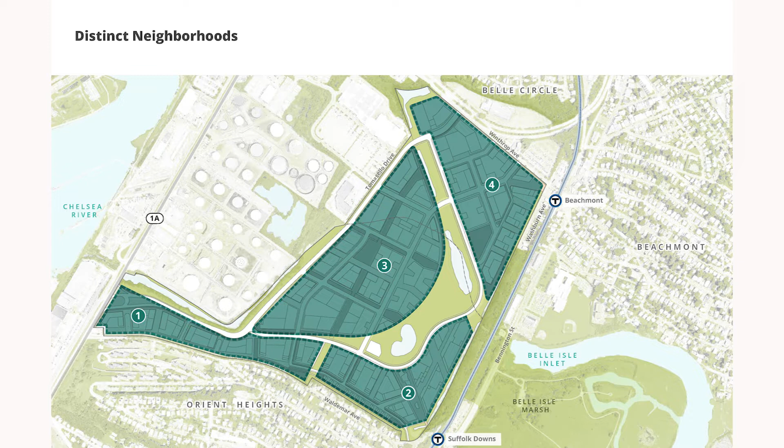So again, coming back to that central common. So here's the central common. This is 15 acres. And after we're done, it still will be light out, presumably, and you can go out and look from the windows here to get a sense of the size of this. But it runs basically from a cluster of trees to the right of the pond that's out there, all the way down past to Sales Creek. So it's a big chunk of open space, 15 acres in total. Again, public, we want this to be very activated by the public.

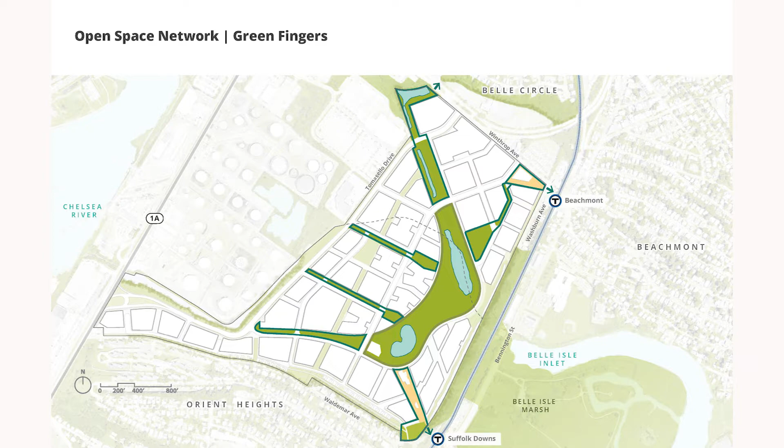And then we want to add what we call green fingers. So these are these pieces that come down right through here, in a north-south axis toward that main park. And the green fingers are part of a water management system. So Doug's going to talk a little bit more about this as well.

But when we think about this from a resiliency perspective, we know that the site over time will be subject to some flooding. And so over a 100-year period of time, this site is measured in terms of the possibility of flooding on 100-year increments. And we know that there will be some flooding, just given the sense of what's happening in the world and all the things that are coming our way.

These are green fingers that will be green during 99.9% of the time. But when there is water that will come in, the green fingers will conduct the water back to the central open space, and we will create a stormwater management system. There's no stormwater management system that exists on the site today, so we're going to have to build that as well. And that stormwater management system will appropriately manage the water and run it off-site as the storm subsides. So those are the green fingers that run through, again, this north-south axis here.

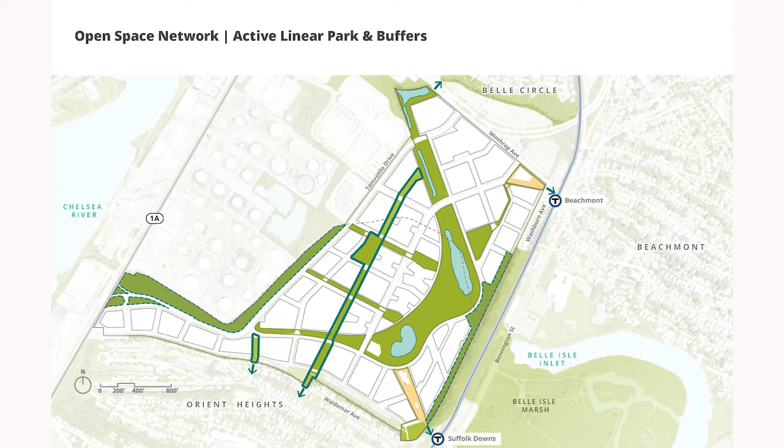And then we think of an active and linear park. So if I come back to this piece right here, this spot right here is what we call an active linear park. So this is a park that we want to have be very active for exercise purposes, for the public, for walking, for whatever. And these are, again, precedent images that give you a sense of the kinds of things that we can bring to that space, different ideas. And these, by the way, are great opportunities for us in working with the public, for you to give us your ideas, your feedback, and your thoughts on what this open space can look like. But that gives you a sense of how that lays out.

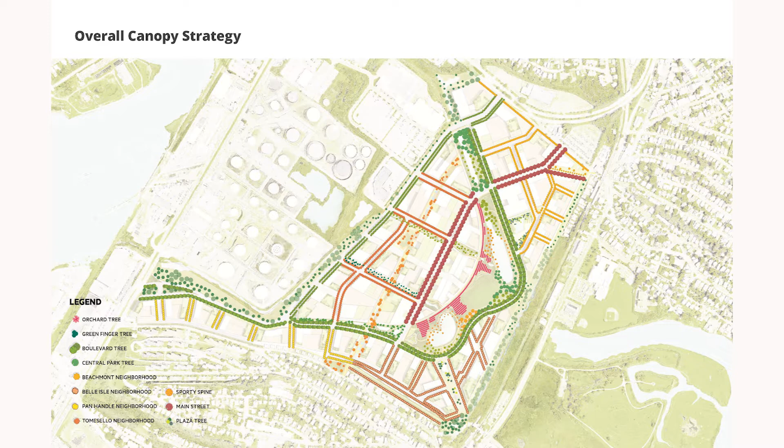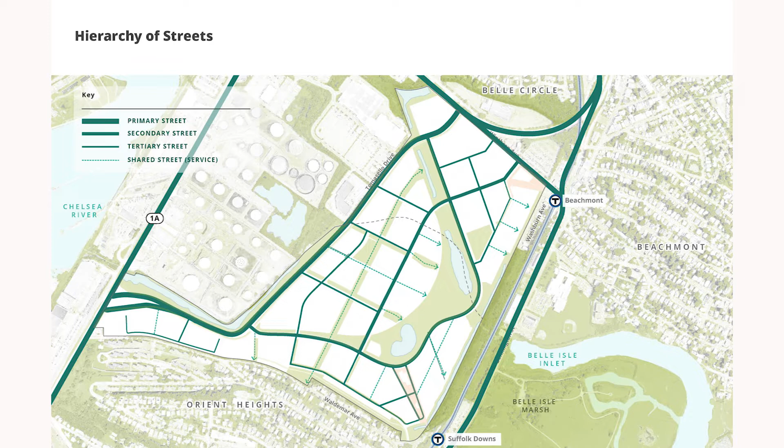I'm going to just run through a little bit more and then hand this over to Doug in a minute. This is a slide in which we talk about the hierarchy of streets. Essentially what this means is there are a variety of different types of streets on the site. As you would imagine, these are smaller blocks within the Revere portion of the site, and these are therefore smaller, more neighborhood-oriented streets. 2 lanes, just 1 lane in each direction. Some of these streets, like Tomasello Drive, are meant to manage more traffic through the site, so Tomasello Drive will have more lanes, and therefore it will be a wider street. So this slide is meant to illustrate that as you go through.

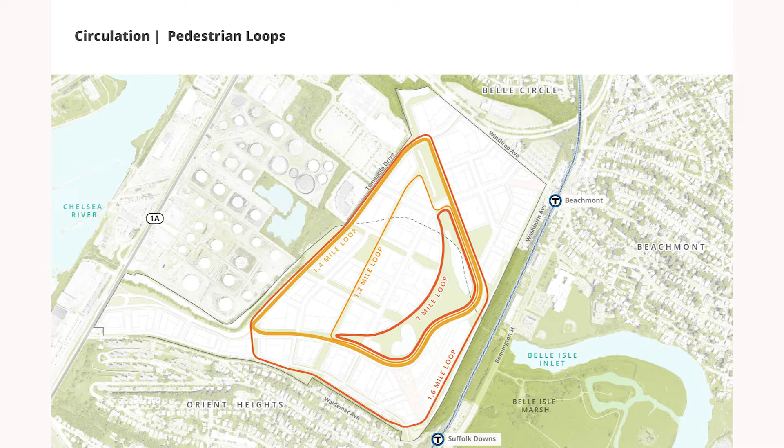These are pedestrian loops. So I identified that one spine that kind of runs through the middle of the site, and these are full loops that allow you to walk or run 1.6 miles or 1 mile, your choice, basically, of different loops throughout the site. It's a big site. Just the distance between Beachmont Station and Suffolk Downs Station here inside the site is a full mile, by the way. So it's absolutely possible for us to create an open space system that creates loops that are really useful and good for people to be able to exercise or walk and really make use of, especially a nice evening like this.

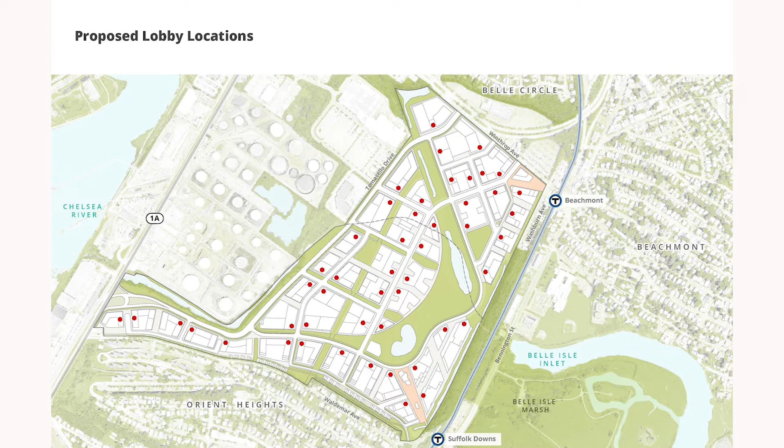There will certainly need to be bus loops on the site. It's such a big site that to get people from place to place, certainly to the T stations as an example, we'll need to think about various bus loops that will connect people to different parts of the site, that will allow people to connect to their office or to their home or to a piece of retail that becomes kind of their favorite retail. So we're thinking about internal bus loops as well.

This is our retail strategy. Again, you've seen this slide, I think, before, but essentially we want retail to stretch and be very active from Beachmont all the way over to the Belle Isle Square section to the Suffolk Downs T-stop. And this is a loop that, again, will be about a mile at least with retail on both sides, making this a very active walk as we go through.

And this kind of gives you a rendering of that retail piece in the midway point. This is approximately in this area here. This is in the midway point with great restaurants, outdoor seating, walkable streets, all those sorts of things. And again, I think we did this civic node previously. So with that, I'm going to give some of the details on streetscape back over to Doug.

Great. I'm still here, able to answer questions as well. Thanks, Tom. Any questions at this stage in the process, folks?

Joanne? Tom, I got a couple of questions. Oh, thanks. So as the president of the Friends of Belle Isle, I know you have a lot of wildlife in this area, and I think when you start building and you're bringing in people to use the open space, you're going to cause these coyotes and whatever we have out there, the bunnies, to move in another direction. We feel that they're going to move across the street to Belle Isle. So what we want to do is push to not have dogs there, so we can keep that sanctuary just wildlife, because the dogs intimidate the wildlife. So I hope you could work with us on that.

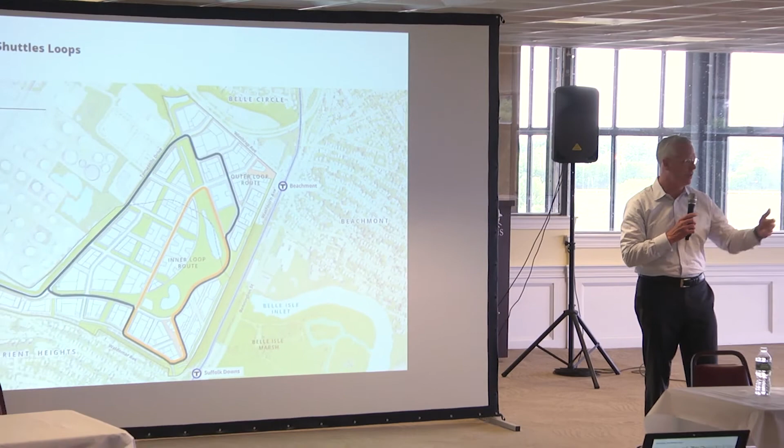And the second one, unrelated to that, but when you were talking about the green space and the pond, any way we can make that like an ice skating rink in the wintertime? Absolutely, that's an easy one. One of the things on the slide was a skating rink, so we absolutely think about that, like Frog Pond on the Common where you can rent skates and all that sort of stuff. That would be great. We're all subject to how many freezing days we get in the future, but hopefully it freezes.

I would just add one quick thing on the walkover. We'd love to do that, okay? But as we get off our site, we're less in control, so we need help from other parties. There's an MBTA parking lot there that might be part of that solution. The DCR runs that road; they could be part of the solution, or maybe not. There are professionals there that are nervous about the slope of that road and the traffic, but we're deep into that right now, trying to help figure that out if we can.

Yeah, just to follow up to that point, you're working with the city to make this fit within the neighborhood. I'm looking for state delegations, city leaders, and so forth to work with these guys to push the DCR or whoever else needs to be pushed to make that happen, because for this to be really successful, that needs to be a major piece of it.

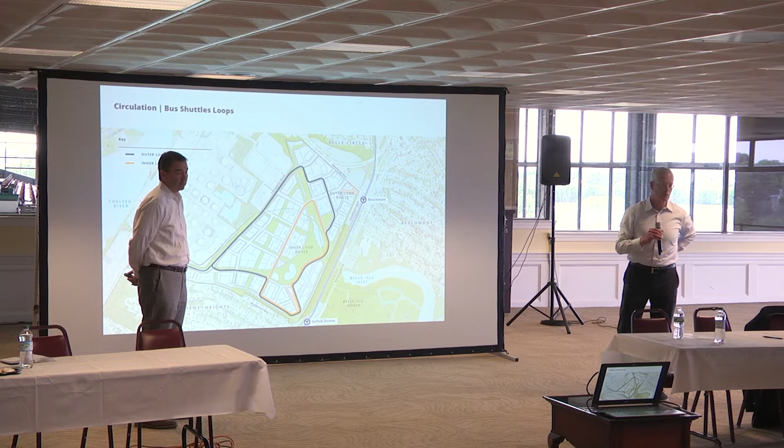We will continue to work with the state. The state delegation has been awesome with us, from the senator to the representatives; everybody's been terrific all the way through. We will use every lever we can to make all those pieces work, and it's certainly a priority of the city. I have a feeling some of these questions, particularly traffic, which we'll have a whole meeting devoted to, might be addressed when Doug gets into his presentation. Why don't we move into that?

Just want to follow up on a couple things too, going back to the Councilor's question. Every building will have a construction management plan with a detailed rodent control section, and we do start in advance. Because we already own this site, we may be able to do some things well in advance. Demolition will probably happen first, particularly of the horse barns, which is actually a good thing, since there's probably a few critters in there today. So we're going to be focused on that.

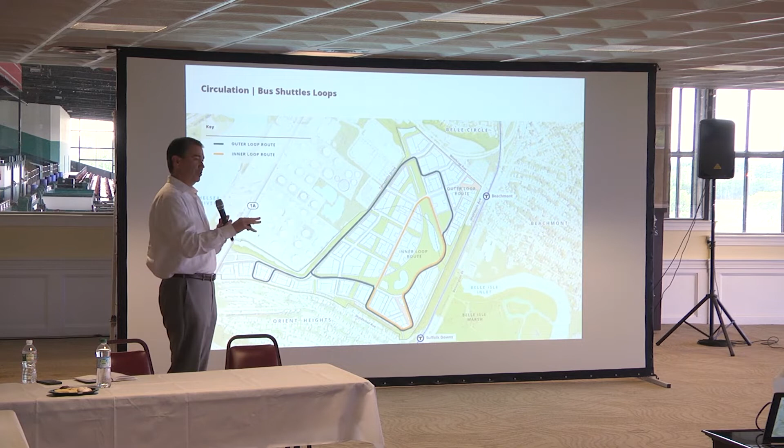I think it's really important to go through that. I had a series of other thoughts, but we'll keep going. Actually, this was the other one too: the reason we're showing you where service and loading was on this map was purposeful, because none of the service or loading is facing outward to any of the neighborhoods around us.

And that's both on the Orient Heights side as well as on the Revere neighborhoods too. The loading is really on interior streets, basically, so that we don't have any loading or service that's on Winthrop Avenue or on Washburn Avenue. And that's pretty purposeful from our perspective. So we do look at it very closely.

As Tom said, as we come back with more detailed design, the site plan review, we'll actually be able to show you exactly where the loading docks are. They'll likely be where those locations are shown, but then we'll be able to talk about the scale of those loading docks. Also, again, these are professional buildings. These are all regular streets too.

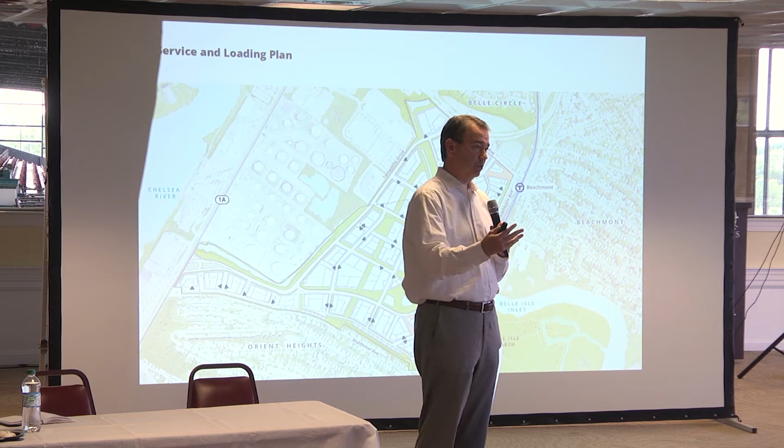So our perspective is this is not some wide open loading dock like you'd see at a grocery store or something. These are really roll down doors, very confined, and the trash and everything is kept inside. So when the trash gets picked up, it's the day of the pickup. They might wheel them out, or even the trash truck goes in sometimes to get it as well. But it's not outdoor type trash, it's always internal to the building. So just want to throw that out there.

And the reason why that's important is because, again, we're lucky, we're not like the Seaport. We can do this right from the beginning. So the cycle track network actually extends all the way through the site, and we're also putting a new one on Winthrop Avenue too. And I'll show you this cross-section a little later, but today, as you know, there's a lane, there's a curb, there might be a 5-foot sidewalk, I'm not really sure, it's kind of tight, and there's immediately a chain link fence.

We're actually going to be giving at least 20 feet of our site to really expand that so that we will have a tree strip, a cycle track, another landscape strip, and then a sidewalk to really make it very beautiful on the Winthrop Avenue side. So we're giving quite a bit of land here to really improve or expand what's happening on Winthrop Avenue.

And then when we get into the interior of the site, we do go back to typical bicycle lanes that are on the street, but part of that is because we're in the retail section now. So we want the bikes off the sidewalk level, back onto the street because it's more of a pedestrian experience. And we'll go through each of these. But the important point was that we're basically trying to interconnect our site, re-stitch Revere back to East Boston and provide a lot of alternative modes of getting around through the site.

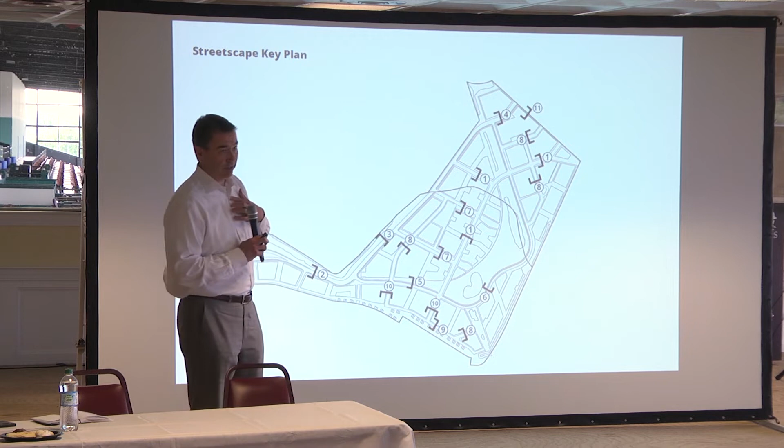But the streets themselves are going to be maintained by us, which I think is a very important point too. So I'm just going to go through the sections of each of these. What this is showing, if you look over here, is a diagram. So this is our Main Street district, and then this is a cross street that goes to the current shopping plaza. What this is showing is a cross section, so this is just showing you how this sets up.

So if you were to walk down the street, it basically shows we have one lane in each direction. We have on-street parking. Again, parking for us is really important from a retail strategy. We want on-street parking on the site. And again, it's on-street parking for people to be able to come here to the retail, or visit the parks. It's not meant to be for our residents, like free parking on site. They should be parking in our garages. It's more for people trying to come visit the site.

And then we have the bicycle lanes. And then we have very wide sidewalks, almost 20 feet wide in the Main Street district, because again, this is the main boulevard. This is the real shopping experience. And you saw the rendering earlier where we showed the restaurants spilling out onto the street. So again, it just gives you a sense of that. And obviously we have street trees as we go through it. So this just shows you a typical section of what that looks like.

Doug, can I just ask a quick question? Two questions actually. In terms of management of the on-street parking, are you planning to have meters? What kind of durations do you expect, et cetera? And a more general question, Boston is much more advanced than we are in terms of the specifics of a lot of design criteria, complete streets, et cetera. Is it fair to assume that all of the streets, whether in Boston or Revere, will be built and maintained to the highest standards required by either or both communities?

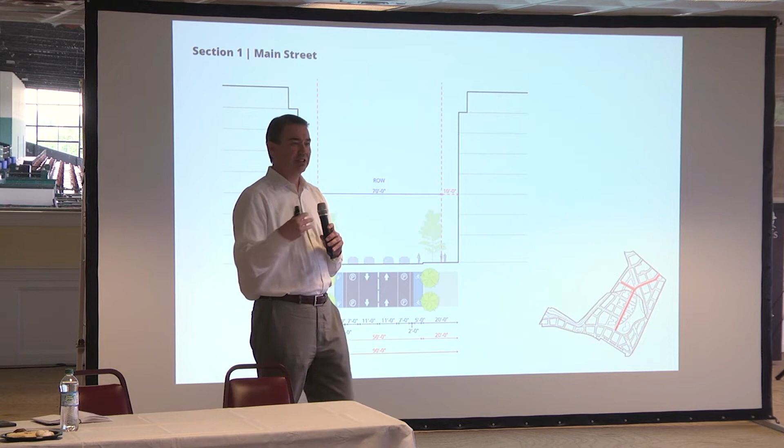We'll definitely probably put a line when you cross over the border, that could be cool, but the idea is not to make it feel like there's a different scale or quality of it. Now, in the neighborhoods that Tom showed, there might be more distinct elements within neighborhoods, but the idea is that the street guidelines will be very consistent throughout the site, and that's very important. So again, this is going to be a very Class A type community from our perspective, so we want to make sure it's upscale.

So curb management, thank you, because a lot of questions Bob always has. So a couple of things. We definitely want it to be regulated parking from our perspective. We see that as two-hour parking, maybe three-hour parking. We also want it to be all the way into the evening. So we don't want to be Back Bay where after 6 p.m. there's no regulation, so then no one can use it from a retail perspective. We want it to be very active.

Also, if I go back to this plan, we actually have on-street parking all the way along this park because we were the developers of North Point, and we had a five-acre park at North Point. One of the biggest complaints from the neighborhood was there was no parking, so they couldn't get to the park to use it. And not everyone's within walking distance of that park. If you're a mile away, that's a long walk just to get to the park.

So again, from our perspective, we want it to be regulated. We haven't really thought about whether it's charged, but it has to be monitored from our perspective. And we have to also work with both cities to figure out if it gets to the point where it gets so busy, because again, the other thing too, we're not only building the open space, we're going to maintain the open space.

That's a huge annual cost. I mean, the prospect of us being able to do some metered parking in the future when there's enough demand, so we can help support it, may be great, but it's not our goal. Our main goal is to make sure that we want to get people to the site, which is more important. But it does have to be regulated because we don't want it to be filled with people going, I'm going to go park at Suffolk Downs to go take the Blue Line to work. That's not what we're looking for. This is meant to create an active site so people can actually come and use it.

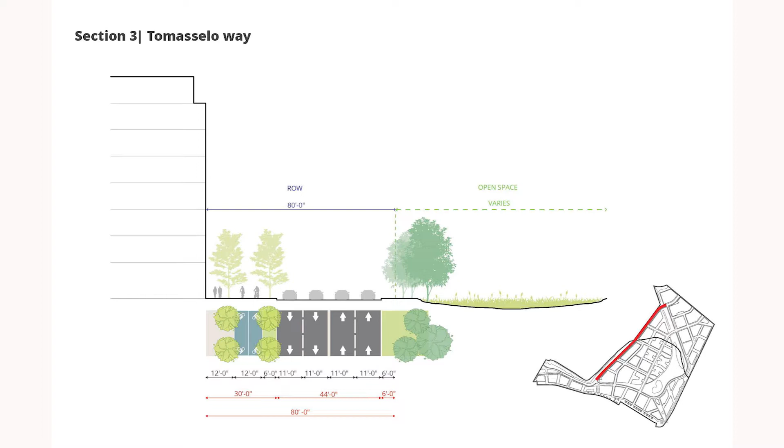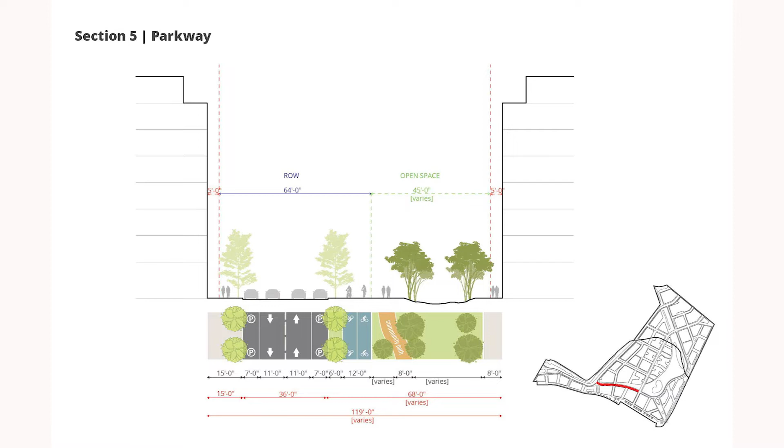Now these are the linear parks. This is where it gets really kind of cool. So, as Tom talked about, we have these really cool linear parks. Here we call this the Parkway. You get a very similar circumstance where you have 1 lane in each direction, parking. Now there's no parking on Tomasselo, which is purposeful because Tomasselo really is a major thoroughfare. But as you get into the Parkway, you are getting parking on both sides. You get the cycle track, which is actually in the park. But separate of the cycle track, you also have a community path, because this truly is a cycle track. So you have a very wide community path for people who want to walk, or when the toddlers are on their low bikes. And then there's the passing through on the cycle track there.

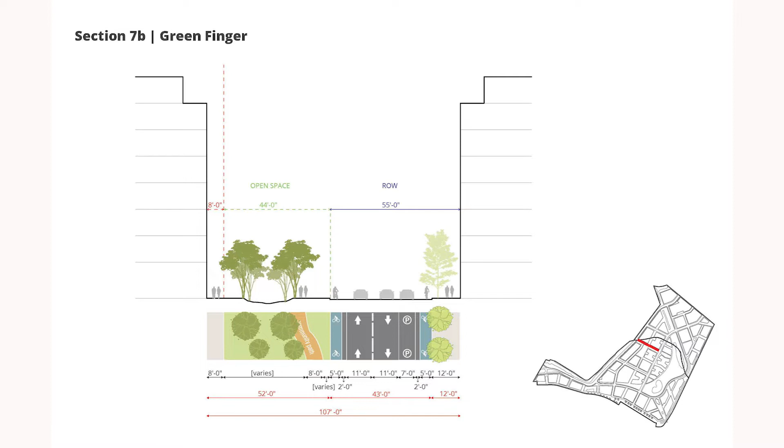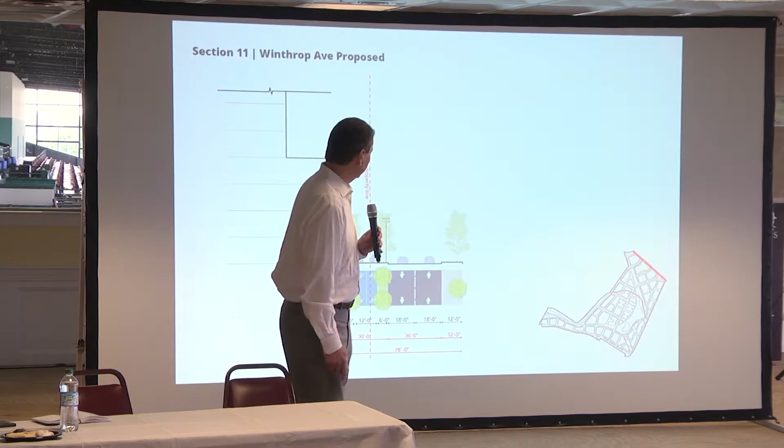Okay. I know those are riveting, but just one quick question. Some of the cross-sections, especially on Thomasella Road, are fairly broad when you add in the roadway, the sidewalk, the bicycle tracks and so forth. And on the other side of that is Stop and Shop, et cetera. Have you begun to look at the pedestrian crossing issues for those major thoroughfares?

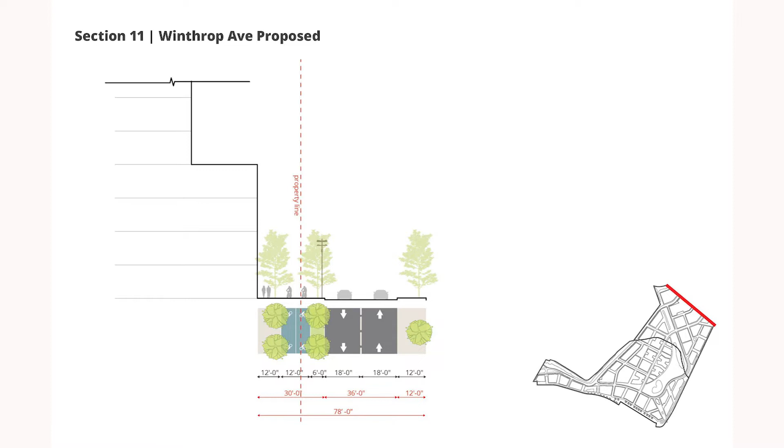Yeah, I think that's something we're going to get into more in detailed design, but I will say this. So if I go back to the site plan, I'm going to jump around, because I think the retail plan is important to show this. So as you know, our retail strategy is around 2 new retail squares or plazas that connect the Main Street district, but we purposely have that Main Street retail district going up this way.

And part of the reason is that some point in the future, these will not be oil tanks or a suburban shopping plaza. And so the idea is that we are creating, which is purposeful right at the intersection, this might even be a stoplight in the future, an intersection here that will really allow pedestrian-friendly crossing across it.

And the other thing too is that the cycle track that goes through will respect it, so pedestrians will be able to get to the edge and the cycle track may actually veer in, so that pedestrians will only be really crossing at one time the 4 lanes across the street. So we don't have more detailed design, but this is a really important connection point that we'll be working on as we go forward.

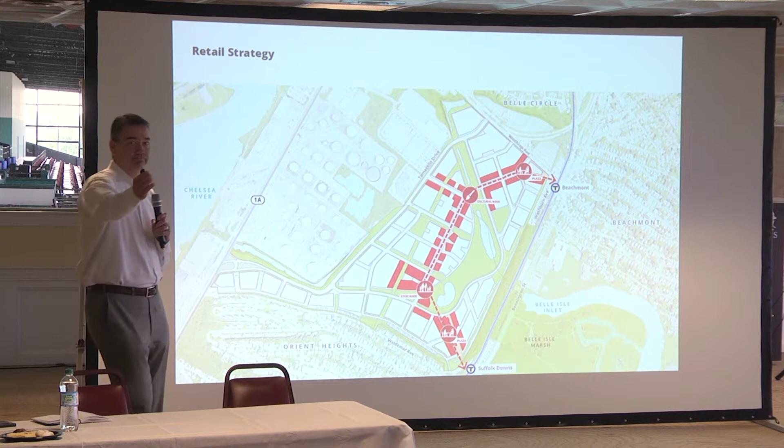Can you give us a little bit more detail about the bus shuttle you were talking about? Can you go back to the slide of how it connects to what you were talking about, and also is it free and open to the public, and how frequently does it run? Yeah, so I think he's asking for more detail about the bus shuttles, where they are, how frequently do they run, is it open to the public? I think those were, is it free? I'm not sure about the free part yet.

So a couple things I would say. In the earlier phases, when we start and we're just building phase 1, we may not have shuttles because we're within a quarter mile of walking distance of the actual T stations. But at full build out, there will be an inner loop and an outer loop shuttle system. And the idea is to connect both T stations throughout the entire part of the site.

This is actually a slightly outdated plan. We've actually updated it. These shuttles actually both go here and then come back. So there's a one-way road now in here. So we got to update this plan, but the idea is that we want to be next to both plazas basically and to connect them through. Frequency at full build out could be running every 4 or 5 minutes basically on this.

We do want this to be open to the public. And again, in the earlier phases, they definitely would be low cost or close to free, but we haven't had that discussion internally yet at this point. But again, it gets robust as we build out the site. What's the reasoning for potentially charging for that and having the parking be free?

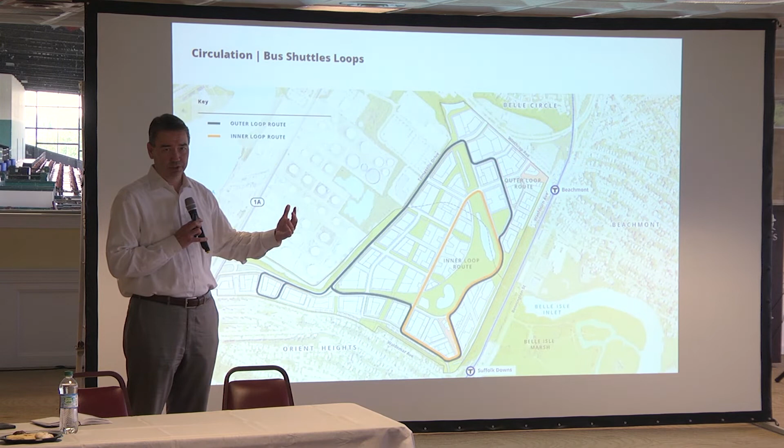So I think the first thing to take from this is that we are committing to do a dual shuttle system, right? Which I think is a very important point, because there are some developers that would not do that. We're also trying to get away from companies doing a whole series of their own private shuttles on the site, and really it's also almost offered as an amenity too, which I think is important. The second thing is our retailers are going to want it to be free, right? Because they're going to get people coming to the T stations that want to go through the site as well. So I do think this is the beginning of the conversation. But I appreciate those comments.

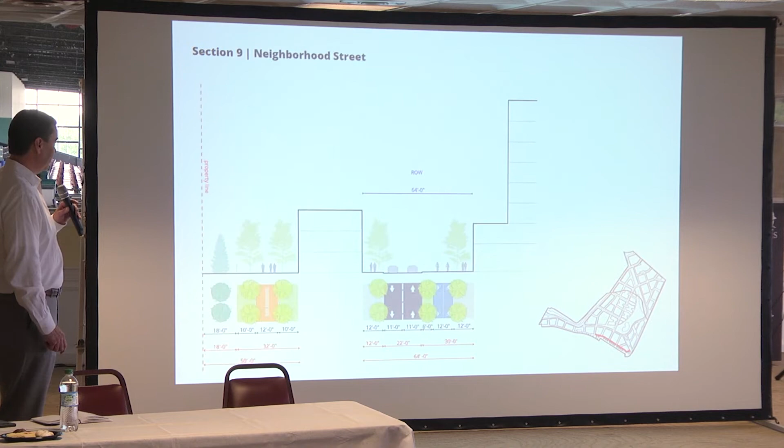Okay. Tom gives me all the exciting topics. I'm going to go to infrastructure next. Yeah.

So this may be hard to read. This is about water and sewer. What you're seeing here is, again, if you recall, when we originally submitted for the first MEPA filing, we had two programs. We had a Program A, which was kind of a pro-Amazon program, a little more office space. And then we had a Program B, which had a little bit more residential space. That really is indifferent to the city of Revere, to be honest. Revere is at least 50% commercial, and we will never do more than 50% residential by zoning, right?

But the reason why we show both of these is that there are differences in wastewater generation and water usage based upon the two programs, because if it's more residential, there's more wastewater and more water use. This simply shows you, in Program A, the amount of gallons per day of sanitary sewage, and then gallons per day of water usage. This is the Boston numbers, and this is the total numbers.

And then again, they do go up in Program B, where there's slightly more water and slightly more sanitary. But just to get through it, Revere is almost 700,000 gallons per day. So this is a big site. So just to give you a sense. Again, this is over 20 years. But we wanted to at least show you those. And this obviously will be in the filings that we do.

So now we're going to get into the weeds. So here is the site, as we know, outlined in blue. And what I'm showing you is the existing sewer system in the area. So in Revere, we have an 8-inch gravity sewer that goes this way, cuts up this way, then comes back to the site, and then it gets to a 36-inch wastewater interceptor, and then eventually gets into the MWRA system. And then it basically goes through Chelsea Headworks to the Caruso pump station, and from there, it's pumped over to Deer Island.

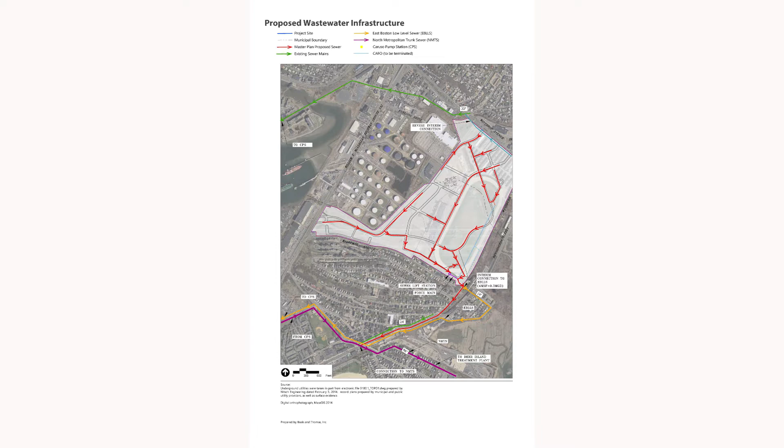So we're actually downstream of the Caruso pump station. Right now, everything in Revere and almost everything in Boston goes to the Caruso pump station. So the fact that we're downstream of it keeps capacity for MWRA as well. So they're very interested in that too. And again, it's kind of a phased approach.

Now, the one thing we're going to be working on with Frank Stringy and the Revere DPW: if we start here at Beachmont, it would be very expensive for us to pull all of this sewer line today to make that happen. So we may be looking for an interim connection through the Revere system for one of the earlier phases. It would only be an interim connection because the idea is that we would eventually switch all of the development over to this Boston connection.

And again, we're doing something similar with Boston. At first, we want to connect to their existing system, so we have the time to build and construct the new bypass line. We actually did this at North Point as well. We built a 4,000 linear foot line. Mike Borowski, by the way, worked a lot on that. And they were thrilled because we didn't have to go through Kendall Square. And so again, they kept capacity.

So I think fundamentally this is a very strong plan. It's just that we're going to need to work with the City of Revere and City of Boston on some interim connections just to get us moving for the earlier phases.

Doug, as you go through that in these interim phases, are there any points where you see any capacity challenges, either in terms of water supply or disposal capacity? Yeah, correct. If we go back, we would not take the 8-inch gravity sewer because that's very constrained. We would probably do an interim connection down Revere Beach Boulevard to get to the 20-inch line that's there.

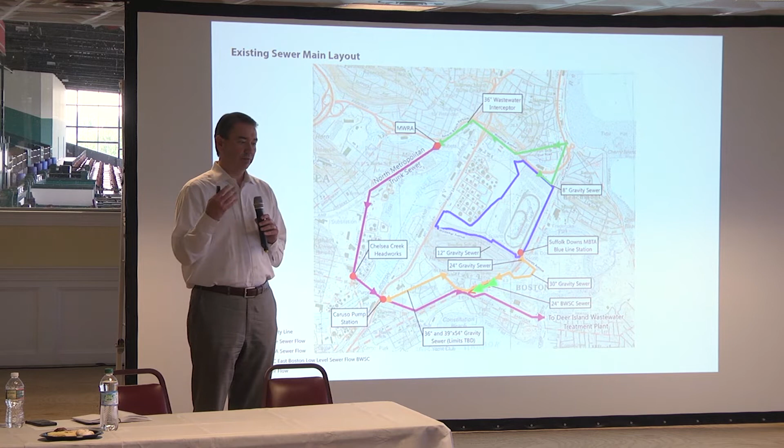Now, the other thing to talk about, and some of you may be familiar with this, MWRA and DEP have a program where a developer, or even a city, can't put another gallon of sewer into their system without taking out infiltration. They call it I&I. What that means is that we're an older region, which means that there's a lot of combined sewer and drainage flows, which means we're pouring stormwater into sewer systems, which means Deer Island is treating rainwater. We also have a lot of leaky pipes.

And so if we were to build a project with 100,000 gallons of sewer going into it, we actually, through the city, have to take out 400,000 gallons at least of I&I, or in the case of Revere, almost 1 million gallons of I&I. So it means that the system always has capacity, because if you're putting a gallon in, you've taken 4 gallons out. So we actually pay fees. We'll be paying fees both to the City of Revere and the City of Boston for these I&I projects. And they're not insignificant. They are on a building-by-building basis.

So the first thing is, because of those, we'll be able to create capacity through the City of Revere. And again, it would be our cost to do a temporary connection. Now, we don't like temporary interim connections because they cost money and we're basically abandoning them. But again, the prospect of trying to figure out how to get that sewer line all the way across the site, because the site's almost a mile across, is we'll go through that.

So I'm going to switch to water. Again, very similar. So this is the existing water. So today we actually get our water from the City of Boston for the clubhouse, I think, and we also do get water from the City of Revere, I think, for the horse barns. There's nothing really out on Route 1A. There's a high-pressure system on the Orient Heights. And then obviously we actually have a City of Revere line, which they just upgraded recently to a 16-inch, I believe.

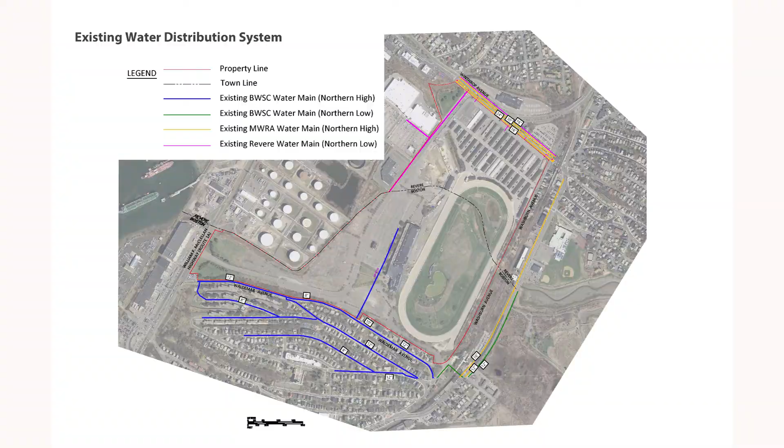Good news for all of us is that there are 3 MWRA lines in Winthrop Avenue today. And I think all 3 are high pressure. So the goal will be that we would actually be coming off of 2 locations and 2 different MWRA lines to feed the site, which means that we won't be coming off of Revere's 16-inch line. And I don't think we need an interim connection either. I think the goal is we'd be tapping right off the MWRA line.

What's that? So I think I'm going to go back. Rich, you want to call it? I think one's a 24, Rich? Size of the MWRA lines. One's a 24-inch. So 30-inch, 24-inch, 16-inch, all high pressure too. All right, so fairly significant water capacity.

And the goal is that we're taking off 2 taps, one from 2 different lines, to serve the Revere portion of the site. And Donnie Goodwin wanted to make sure of this too. There will be a Revere meter, so really it's the MWRA selling water to the City of Revere through a meter, and then it sells to us. So Revere is still selling it to us. We're just not tapping it off of the existing 16-inch Revere line.

Boston would actually also have a connection coming off the MWRA line. It would actually cross through City of Revere property, and then there'll be a Boston meter at the Boston property line. We're still working with MWRA who owns that stretch. It might be them, it might be Boston with an easement. And then that would tap back into the high pressure zone on the Boston side, so they would have redundancy too as well.

And again, if we start from Beachmont, it's pretty easy in the water because these would be in the new streets we're building, so we would just do the new lines. So the good news there is that we're really not impacting the local Revere system. MWRA is modeling this as we speak, and we're working with them on that. But again, that's how water would work. I'm going to pause. Any questions on water or sewer before I go to resiliency?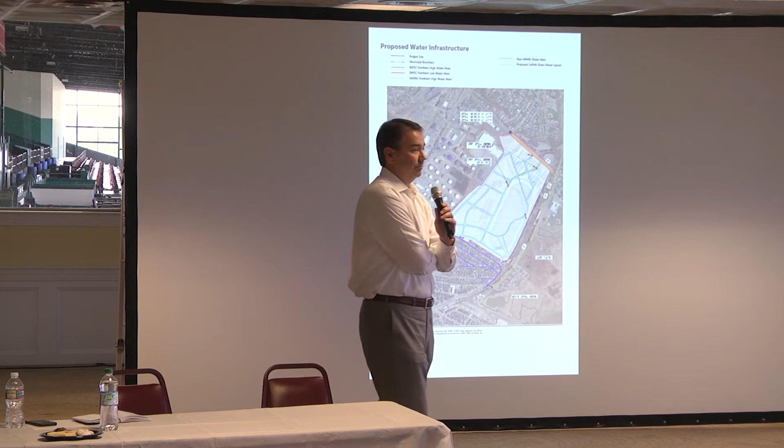I think he answered the question, but I just want to ask it again. Right now the Beechmont Hills have very low pressure. With the new water line, we'll probably get better pressure. I've seen a little bit of improvement, but it's not going to affect the hills of Beechmont? So by you pulling it from the Revere line, it's not going to affect the... So we don't pull it from the Revere line. Oh, okay. We'll pull directly from the MWRA lines. Okay, I don't know the difference, so.

So there's actually 4 water lines in Winthrop Avenue. One of them is a City of Revere 16-inch new water main, and there's 3 separate MWRA lines. We won't be tapping into the 16-inch Revere line. And we did that because the City of Revere gave us feedback on modeling that said if we did that, we could potentially impact water pressures, probably more in fire situations, so we decided to move away from that. In the MWRA system, given the 3 lines and the amount of pressure and volume they have, I don't think we're going to see any perceptible difference in the City of Revere. But we'll be working with them and obviously with DPW.

Doug. Yeah, so they're more regional lines. I don't know if Rich knows the answer to that, but I think they're regional lines. Some of these are lines that are just going past as well. No. Yeah.

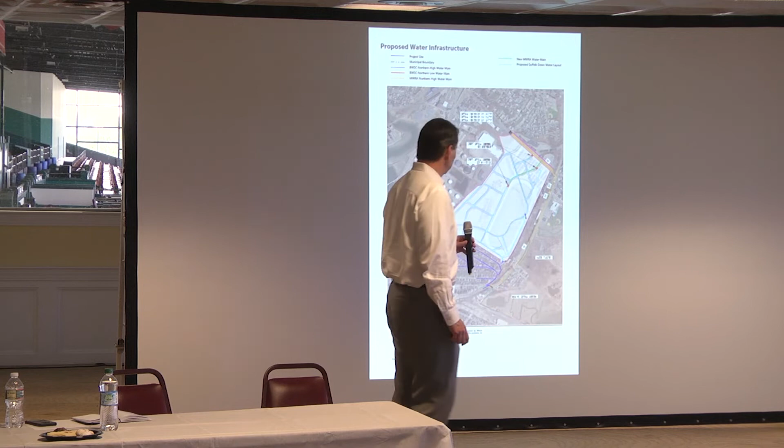Correct. Doug, if I may, on that Winthrop Ave line or Revere Beach Parkway line, from where they just started the new 16-inch, beyond that, westbound, from, say, North Shore Road going west up to Woods Avenue where the PRV is, some of the lines there are in tough shape. I'm not sure if they're the MWRA lines or our lines, but if we put any more pressure on any of those, there may be some issues because we've had a lot of breaks up there.

So we'll definitely work with the MWRA. They're studying it because we're tapping off of their system. Clearly, I don't think we'd be putting more pressure on the line. But it's a good comment, and we'll follow up with MWRA just to make sure that we're not having any downstream impact either. Okay.

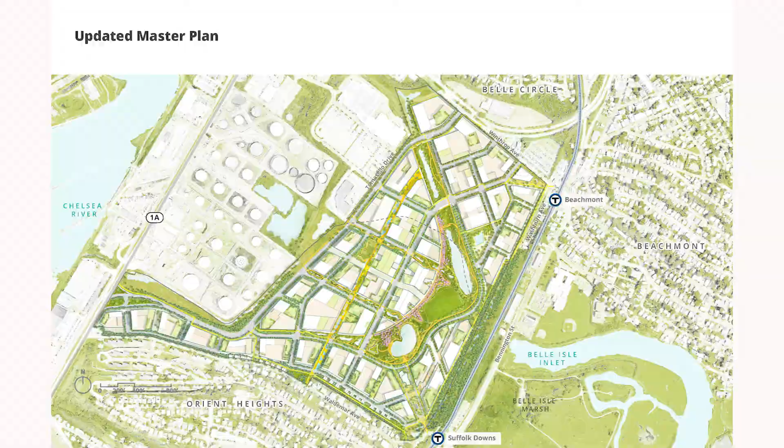Resiliency. This is just a rendered version of the master plan, again showing the open space system. This is hard to read, but this is showing existing grading of the site. The main point is that we're approaching climate change in a forward-thinking way, and we're lucky because we almost have a clean slate. We have 161 acres with no existing improvements, which is very different from the Seaport District, which was really fully built out from a roadway system before they got into climate change or sea level rise.

So the idea is that we're raising certain areas of our site to be outside of the current 100-year floodplain, to the point where we won't be in the floodplain through 2070 or beyond. So that's step 1. But step 2 is that we're purposely leaving some of the open space areas a little bit lower. The idea is to create additional storage for major storms, whether it's a rainfall event or a coastal event.

Sorry, I'm standing in the way. I'll back up a little bit.

And so this just gives you a sense of what the site is. So currently today, the floodplain elevation is lower than 17.5. So the areas that are in the floodplain are really towards the horse barns today. And I think most of you know that there are low points into Beechmont Square and things like that. But some portions of our site are pretty high.

So what this shows, and again, this plan is hard to read, but the areas that are yellow or orange are for the most part above the 100-year floodplain, all right? And some of this is fill area, right? And when we say fill, we're talking 1 to 3 feet in some areas, maybe 4, but it's not really huge areas of fill. But the light green area is actually below the 100-year floodplain as we get into 2070, but it's purposeful again. And again, this is a 100-year storm event that is a pretty strong event.

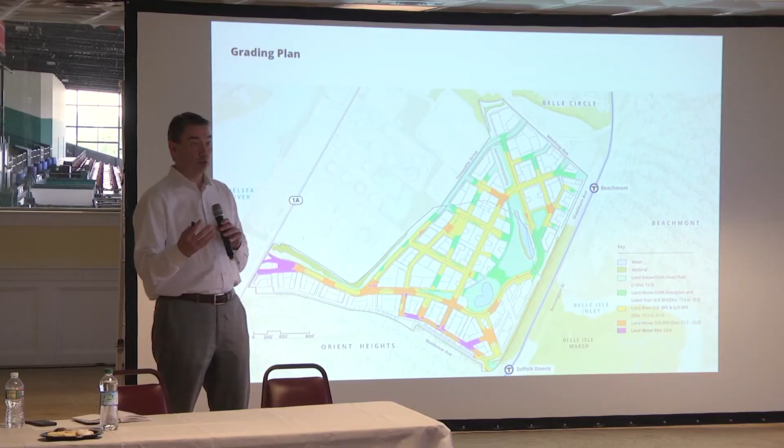And what it allows us to do, it allows us to really create additional capacity that we can retain more stormwater onto our site, which is really important. Or if surge comes from the ocean, we have more areas to push it or gather it than we may have currently today. So a couple of things we're also doing.

MEPA has asked us to do a climate change study. And what that means is we're doing a detailed computer model looking at major rainfall events today, 2035, and 2070, okay? So going through that time frame. And we actually layer in up to 40 inches of sea level rise by 2070 in this analysis. And it'll show comprehensively how the stormwater works, both from a rainfall event as well as a coastal event, which will be, I think, really helpful.

It'll show vulnerabilities not just on our site, it'll probably also show vulnerabilities around our site, like what you guys know, Bennington Street, around the school, Route 1A. And then with that, we'll also start to identify potential mitigation solutions that better prepare the community as well as us for future stormwater change.

A little about existing conditions too. We have one very beautiful pond out here. Outside of that, there really is no real stormwater control or detention on the site today. This site was built in the 1930s, so when it rains, you may know this, everything pretty much goes through detention or stormwater grates, and it goes right into Sales Creek. There's nothing holding it back today.

We're designing this system to new guidelines so that we're actually going to be retaining 8.8 inches in a 100-year storm, and I think it's around 6 inches for a 10-year storm, which is well above what people have been currently doing. And the idea is that we're expecting more extreme rainfall events. And I'm going to show you a series of slides that kind of shows you.

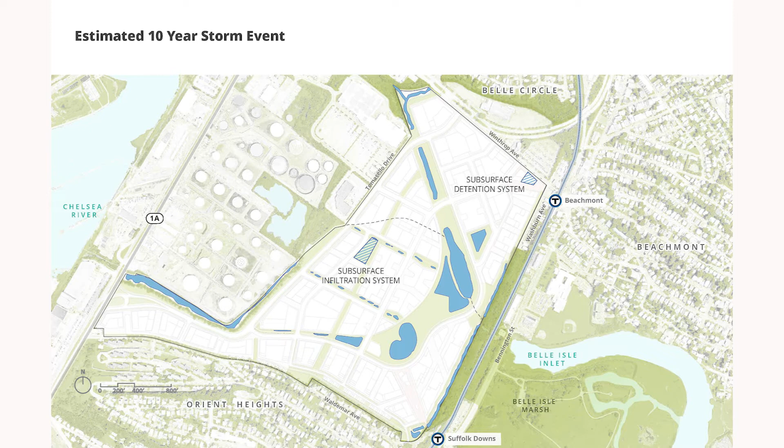In a 10-year event, this is a bigger storm, and you can see how the water continues to fill up the site. And again, the good thing about this is that we're holding the water back. Today, everything crashes into Sales Creek. We're actually holding it back and releasing it more controlled. And you get to a 100-year event, and again, we're really retaining that water, which is really important from our perspective.

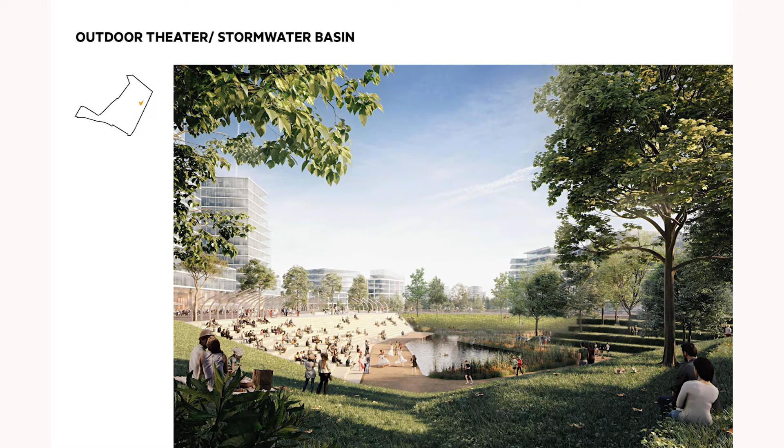This is a good example. So here is the outdoor performance theater. And on a typical day, there's detention in the bottom of it. If there's a 100-year major storm event, we've designed it so it can really fill up with quite a significant volume of water. And this is just one area on the site. So this is how we're kind of thinking about it as we go forward, which is really important.

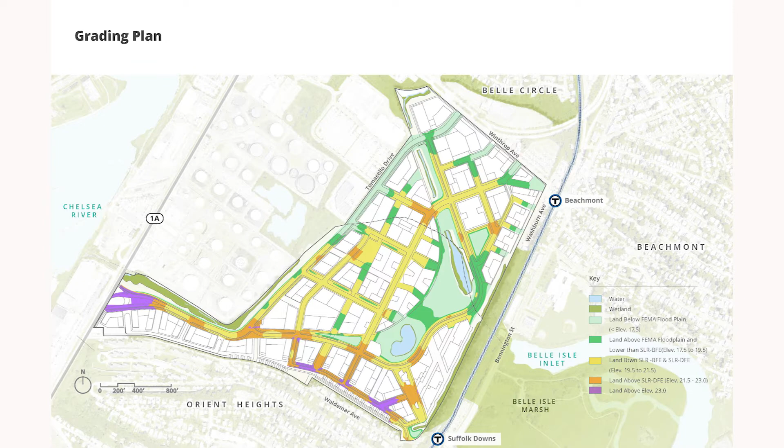Could I just ask you to go back a few slides? Yep. You had yellow and green. The building sites were white. Correct. Are all the building sites being elevated above the floodplain? So most of them are. There are some places where in 2070 it's hard for us to get, because again, Winthrop Avenue is pretty low. So we do have to transition back down to existing streets. The goal is that the majority of our buildings will be outside the 100-year floodplain.

Where buildings start to get into the 100-year floodplain, the idea is we will move critical infrastructure, like the transformers, up to the second floor. We won't have any ground floor residential units. So we can have retail, we can have amenity space, we can have lobby entrances, but we wouldn't have any kind of critical infrastructure. And again, this is a storm event that's supposed to happen once every 100 years.

But it's not like the site's flooded for a week, right? It's the flooding that comes in with the high tide. It starts to go out. It may come back a little bit with the next high tide. There's a cycle to these types of storms that last several days. But that's how we'd be addressing it. And part of that is the buildings around here. I'm going to show you another slide in a second to talk about the vulnerabilities, because the flooding that happens up in this area, first and foremost, is definitely coming up through Belle Isle around the school.

Which is sort of my next question, and perhaps you'll be addressing it as you go forward. But as you improve your water retention capacity on the site, will that have benefits for the surrounding area? Because there is a lot of flooding, as you indicated, particularly around Belle Isle Inlet and the surrounding neighborhoods. Will that be improved, unaffected, or made worse by what you're doing on site? Well, first, it should be improved because we're retaining a lot more water, where today it's just being simply released right into Sales Creek. So it will be improved in terms of peak runoff volume.

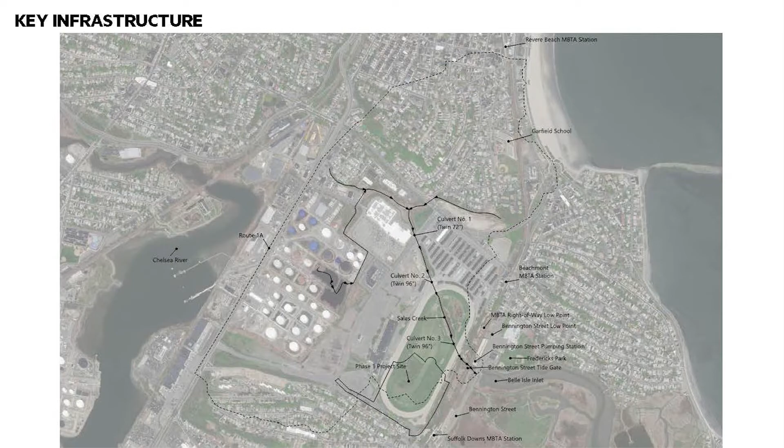So I think we'll come back with more detail. We have to finish the model and run it, but we'll be able to show you, and it's actually a really cool model. It actually runs in real time. You can see a 24-hour storm, and it shows you where the water goes, how it builds up, and then also how the site drains. And you can almost see a little bit of tidal action as well. Confluence of high tide and major rain events together. Yeah.

Can I ask a question? Yes. Doug? Yes, you can have it after.

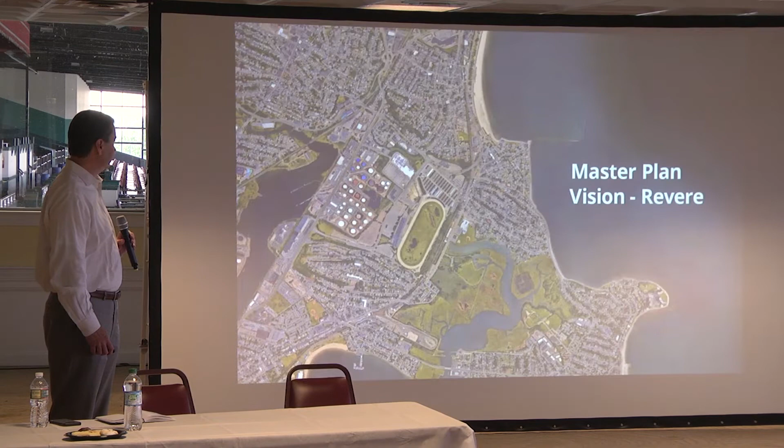Probably about 15 years ago, there was a plan to dredge the creek. There was money allotted for that. I don't know where the money went, if they used it for the Big Dig or whatever they did. But at one point, they were going to dredge the creek. I do think that would help with flooding, especially around neighborhoods like Pearl Ave, Belle Isle Ave, Crystal Ave, Everett Ave, Bennington Street. That little inlet was supposed to be dredged about 15 years ago, and there was money allotted. I don't know who the governor was at the time.

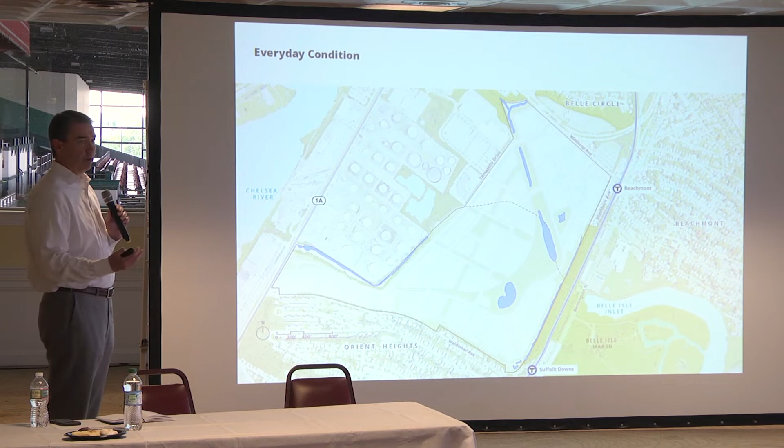It could have been Dukakis. It could have been a long time ago, but yeah, so no, it's a good thing. We definitely have heard things similar to that. I can tell you that we do know that DCR dredged Sales Creek on the site because they spread the dirt onto the site, and that's why portions of it are raised. I don't know what happened further up, and to be honest, we don't know all the full details of that.

I think when we show you the model that we're running, and the model is two models, right? Because what you just said is very important. It's actually two models layered. So one model is called the Riverine Model, which means we're studying a rainfall event that comes into the Sales Creek watershed. And that shows a very specific level of flooding. It's all based upon rainfall and how it gets through the system. And it's actually a fairly small watershed here.

That then is layered with a coastal model, which is a FEMA flood model, which is showing tidal surge also coming up. And the scenarios that we're doing, we're getting scenarios that eventually get so high that they do overtop Bennington Street, and the pumps can't work at one point. So we actually model into it what happens if the DCR pump station stops working for 4 or 5 hours or longer.

And again, we don't have it done yet, but it's pretty cool to actually watch. But I think it will actually really help us understand too, based upon the modeling. And it's a 2D layered model, so it's a very highly detailed model. It'll show pretty quickly what you guys are describing; the model actually shows it.

And the last storm, it showed flooding coming right through the school, overtopping Bennington Street, filling up the two wetland areas between Bennington and the MBTA tracks. And you could actually see, when it drained, it went right back out the same way it came in. So I think it's gonna be really helpful. And I think I have a slide, I'm gonna go forward here. Oh, actually, I don't think we have it.

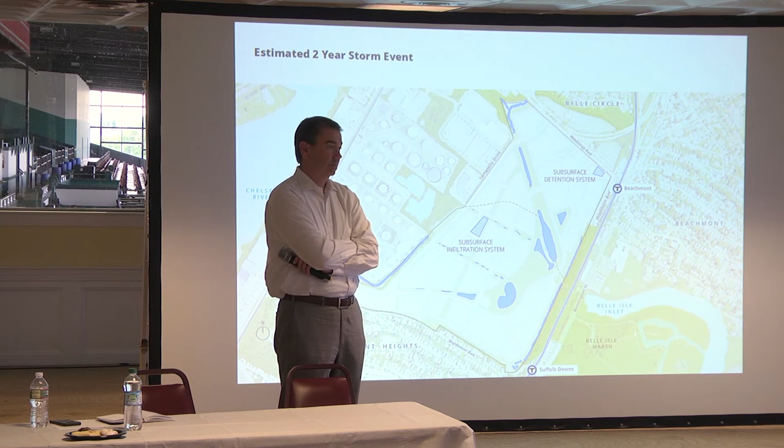Now, with the flooding study, with everything that's going on, I think that's huge. If you could be an advocate for us as we are an advocate for you, we can even get the East Boston neighborhood to have that dredge, it would be a huge piece of this project long term. And I know Speaker DeLeo would be on board. No, I think it's a really good point. That's helpful for us to know as well, because we're going to be here for a long time, so we really are all in this together.

And our goal is, first, we're going to identify what the vulnerabilities are, which you guys already know, but it's going to show you how it goes over the next 50 years, which I think is going to be really important. The MBTA has asked what are the impacts to the Suffolk Downs T station, the tracks, the Beachmont station. Beachmont is elevated, but if you can't get in the front doors because there's 2 feet of water, it doesn't really matter. But those are things we want to go through.

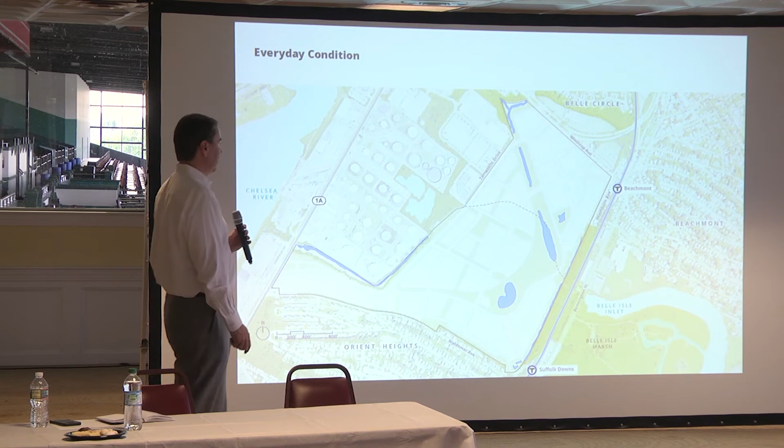And then I think the next goal would be to look at, are there earlier term solutions that are easier fixes, that might be around the school and thinking about the barrier type system. And then what are the longer term solutions? And again, DCR is a big player as well. Correct. And the good news is that Bennington Street is very wide, and there's a lot of wide shoulders, but again,

the study will help because it will confirm what everyone who lives in this neighborhood already knows, where the water is coming from. But there's definitely some potential solutions that don't have to be done in 2 years. But if we know what they are now, we can plan for them, or work with other developers besides ourselves to start finding ways to protect the site and the neighborhoods. Will the results of the study be available for your DEIR submission?

Yes. Okay. Yes, and I think we're running probably over 40 scenarios, courtesy of MBTA. So it'll be pretty comprehensive. And there's even one nuance that came up too. I think with the MBTA there's a certain gate or valve that sometimes they close between the neighborhoods. Some nuances were brought up to us that we'll be looking at as well. All right, so I'm going to move away from climate change and resiliency.

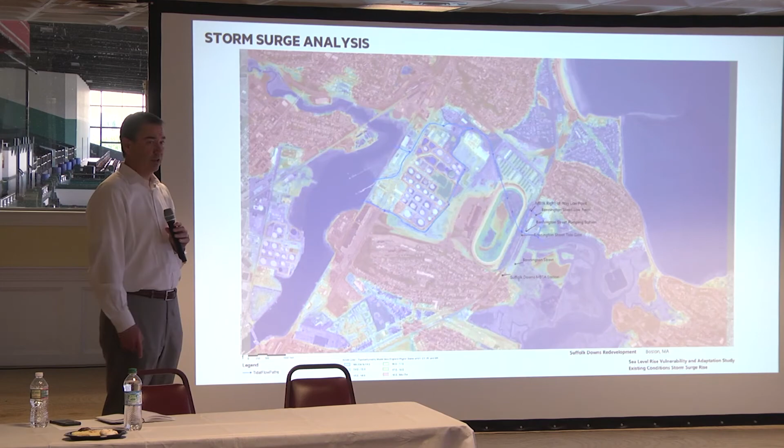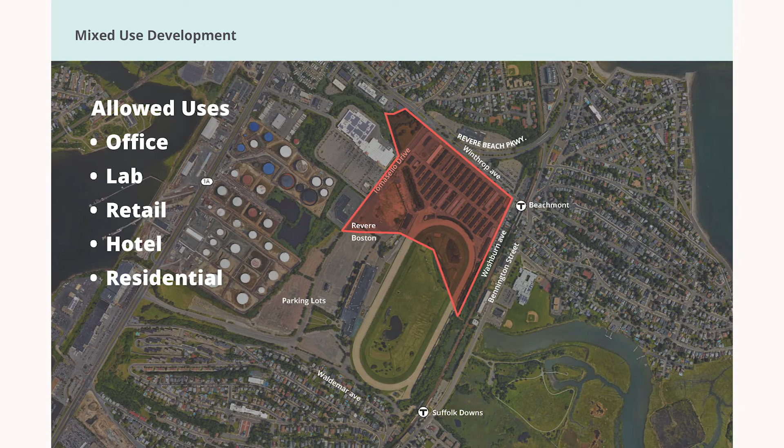This is a little bit of a repeat, but we're going to go back into a little more detail on phase 1. Most of you have seen this, but here is the Revere portion of the site that's shaded. As you know, we've already passed the zoning overlay district, which covers the area in red. Proposed uses were outlined, proposed FAR, required to have a minimum of 50% commercial and minimum 25% open space. And the heights and setbacks were included. Allowed uses: office, lab, retail, hotel, and residential. There's a much more defined use in the overlay district, but these are the general categories.

And this zooms in on the Revere open space, or the master plan. So here is Beachmont Square. Here is the Innovation Center. This is a hotel. This is the Main Street Retail District. There's the Outdoor Performance Theater. That's the community path connection from North Shore Road. Obviously Sales Creek, beginning of the active linear park system. And it gives you a sense of that. This was the height zone map that was approved as part of the overlay district. I won't spend too much time on this.

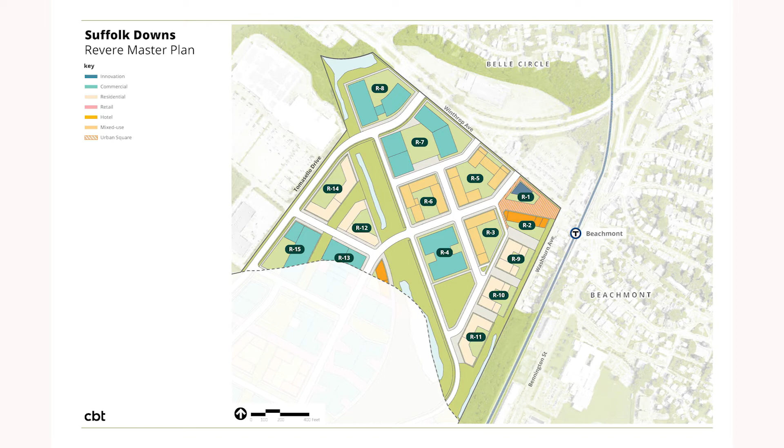And this is the uses. I think you guys saw this last week, but orange is the hotel. These 3 buildings are mixed-use buildings, so residential over retail uses. Blue is the commercial buildings. This is a second hotel. And then these actually should probably be orange as well. There is retail in this area, but the light is just residential.

Just to review the program: 52 acres, 5.8 million square feet, minimum 2.9 million square feet of commercial, and maximum of 2.9 million of residential. And again, as the site gets built up, particularly if Amazon comes, those numbers might shift, but this at least is the base.

So in here is the phase 1, and I'm not sure if you guys, did we show this last time, Tom? Yep, okay, good. So again, I don't mean to repeat myself, but this is the phase 1 program, which you guys are aware of. I don't know if we showed this. This is more of a zoomed in. So this is the retail strategy with the first phase. So again, this is the incubator innovation space. That is the plaza space. And this just gives you representation of the type of places that we're looking at having.

So we'd love to have a restaurant, coffee shop, cafe, maybe a wine bar, probably a bank. Because again, it's also about residential services. It's really important that we have places for people to bring their dry cleaning to on site, things like that. We would love to have a drugstore in the earlier phase on this site. And again, when we come back for site plan review, we'll have a better sense of the retail we're thinking of for each phase, but this gives you a sense. This is continuous street front retail, and we actually have a heavy amount of retail in this first phase.

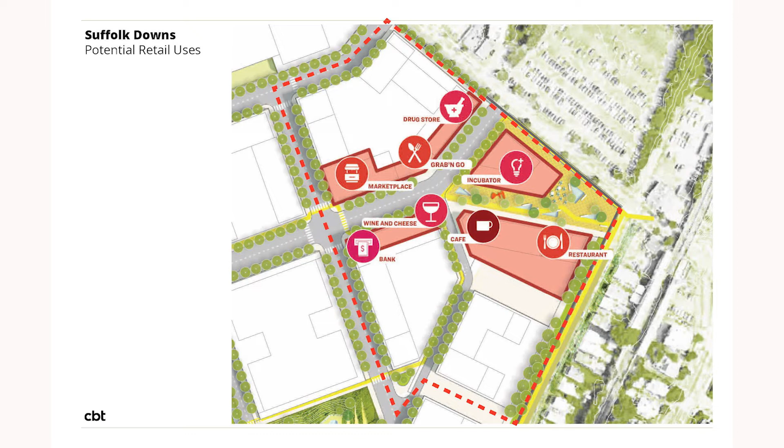This just shows you all the connectivity that we kind of go through. So again, this is pedestrian, bikes can go through the plaza. Again, this is the updated plan. Our shuttles actually come through this single one-way road and then go back into the site. We have the bicycle lanes on the side streets. So again, it just shows you more of the detail. And then the cycle track on Winthrop Avenue.

One thing we talked about before too, we are looking at how to bring the East Boston Greenway from Constitution Beach all the way up to Revere Beach along Bennington Street. We are working with VHB right now to see how we get through Donnelly Square with this kind of community path. And we see it more as a community path, not a cycle track. There's a lot of lane width on Bennington and the shoulders until you get to Donnelly Square, and so we've got to work on that as we go through it. So our hope is we get to the transportation meetings and later in July, we'll have some preliminary thoughts we can show you.

This is just the ground floor plan. Again, we kind of went through this. And these are precedent images of the Innovation Center. This is actually District Hall in the Seaport District. I think we're looking at more than just a one-story building for this, but the idea is it's going to be a distinctive character from our perspective and really a place-setting type thing. It's a combination of meeting space, work incubator space, some retail. It's all kind of mixed in, but it's a really dynamic place.

And you guys have seen this rendering, looking back at Beachmont Station. We are working on a new rendering. I'm not sure when it's going to be ready. We've taken a photo from right next to the Beachmont roast beef, looking at the existing site, and we're going to create a rendering that shows that exact same viewpoint in the future. We've always been showing this shot, but we're going to turn ourselves around so that people can feel like, well, what is it like? Because today, it's kind of hard to have a vision when you're looking at the fence. And again, these were just the aerial renderings that you guys have seen before.

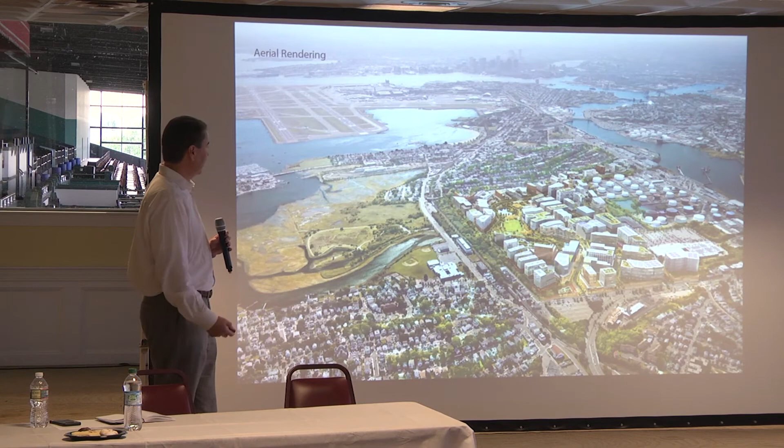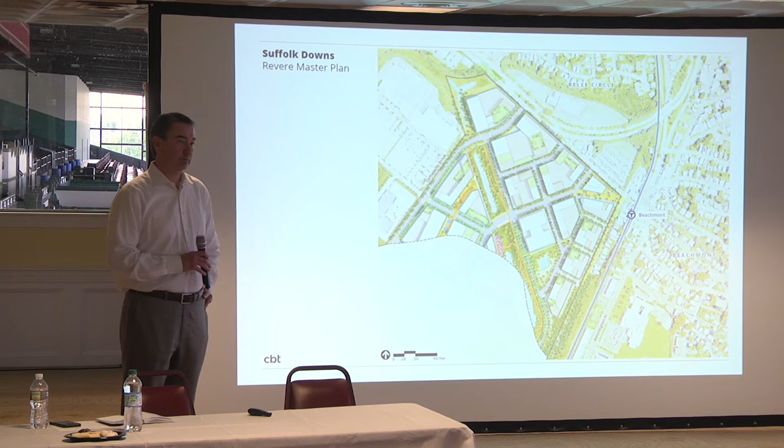So I think. Could I ask a couple of questions, actually, in this last section about conservation issues and opportunities? Yes, please. You've made the point that you're beginning from scratch, so you can do this right from day one. What are your strategies for water conservation, water usage, not water drainage, for energy conservation? How do those strategies inform the type of architecture that you're considering for the buildings? Not just the systems within the buildings, but the energy efficiency of the structures themselves?

And finally, related to infrastructure, what are you thinking about in terms of communications infrastructure? It occurs to me you're building a community, a neighborhood of the 20th century, which will be based on wired, wireless. 21st century, excuse me, I'm getting old.

But, wireless technology, microfiber, et cetera. What are your plans for building that kind of capability in from day one? I know Billy Rogers worked on the Central Artery Project, and one of the unknown benefits of the Central Artery Project was the so-called utility relocation, which really created new microfiber communications technology for the city that will last for a century. How are you thinking about those things? How are you thinking about conservation, energy, water, et cetera?

Okay, so it's a lot of questions, Bob. I'm trying to remember all of them. You're going to have to keep me honest on what I'm answering.

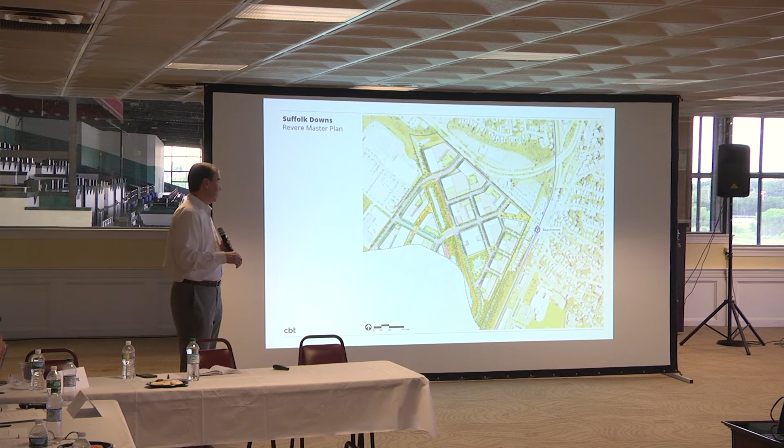We'll clearly be using low flow toilets, things like that. And again, the idea is to really conserve water when we can and reuse it as much as we can, and to really retain it on the site. And then going back to Boston Complete Streets, Boston Landing is probably the best example of this most recently. This is where the Bruins training facility is and where the Celtics just opened up.

If you walk on that street, you'll walk down the sidewalk and you'll see a tree, and there literally is a rain garden around that tree. So they actually redirect water. Instead of it just going into the street, into the storm basin, and then into the detention basin, we're capturing a lot more rainwater off the sidewalks that goes directly into landscape strips, which is really important too. So there's all these ways we're trying to be more efficient with water. So that's how we're approaching water.

Talk about buildings for a second. So most of our buildings are LEED Silver or LEED Gold, for the most part. 2020 was LEED Silver. Boston Landing, which is Lanterra, 125 Guest Street, is LEED Gold. The two buildings we're building right now in downtown Boston at the Government Center Garage are going to be LEED Gold. LEED Silver is fairly achievable in an urban district. LEED Gold gets a little more expensive. LEED Platinum is a leap. So I'm not sure we're there yet on some buildings.

But we do look at that. And when we say that, we don't just look for a plaque. We're actually really into the LEED checklist, looking for what are the energy conservation methods, how do we reduce the energy use. So it is a really detailed thing. And we can come back and talk more about that as we go through it. But I think it's a very important thing for us as we look at this site.

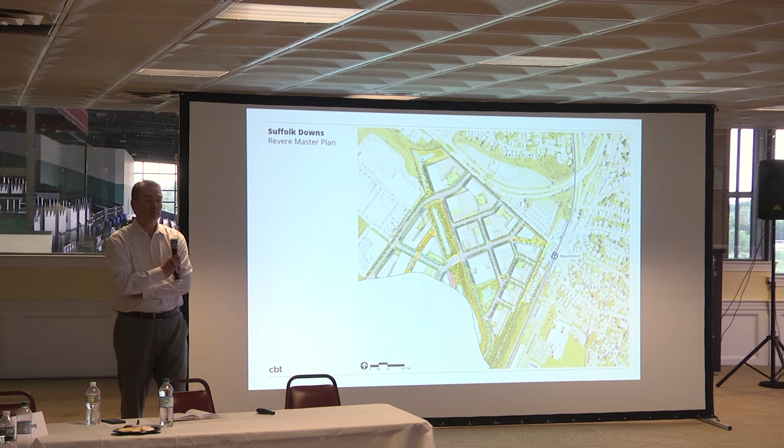I would just note one thing with regard to that, which you can address if you can. There were comments on the EENF about energy efficiency in this context. There are a great number of energy efficient systems and types of equipment that can compensate for the inherent inefficiency of the structure itself. And the real win is if we can build an inherently efficient structure that is then leveraged and enhanced with efficient systems and equipment.

And without going into the details of what kind of structures are inherently efficient or not, I would just note that we made reference to that, others made reference to that in these comments, and I think at some point it would be very helpful if you could share your thinking about what could be done in those regards.

So I can share our initial thinking. So Bob, you have a really good point. The most important thing about energy loss or energy use is the envelope of the building, right? And for many years, our industry has probably lost track of that, and I think we're getting back to it because basically you lose your heat through the windows or through the wall cavities or how it's beefed up. So that's become a really important point.

I can tell you that our proposed buildings, and you'll see this, so the MEPA filing will have energy models. So we have required code, which includes stretch code, by the way, and you'll see what we're proposing, which is above code and above stretch code, which I think is the first thing. Part of that goes to window-wall ratios. How much glass do we have versus solid walls? And there's always a balance between marketability and that type of stuff.

We've also been asked to look at other stuff such as more aggressiveness. Someone's asked about passive house, so we'll have a section about passive house. Passive house is basically an approach to design where you reduce building energy use by almost like 65%. It's a very aggressive approach. There's only been one done in Boston, and that's been in South Boston, and it's a small 30-unit, 34-unit type deal. So I think it's still ahead of us right now.

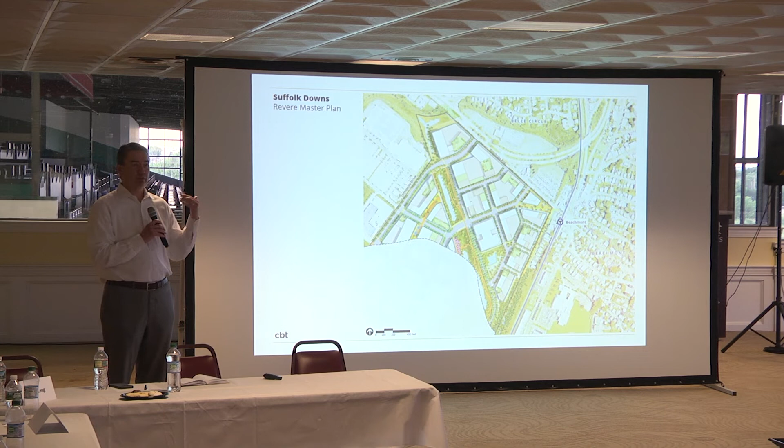And we saw that at North Point. When we first got to North Point, there was Verizon and Comcast, there was no one else. Before we knew it, we had Level 3 calling us up, and they were pulling lines a half mile to get to our site because of the tenants that we had. And so there's definitely some opportunity, I think, as we go there.

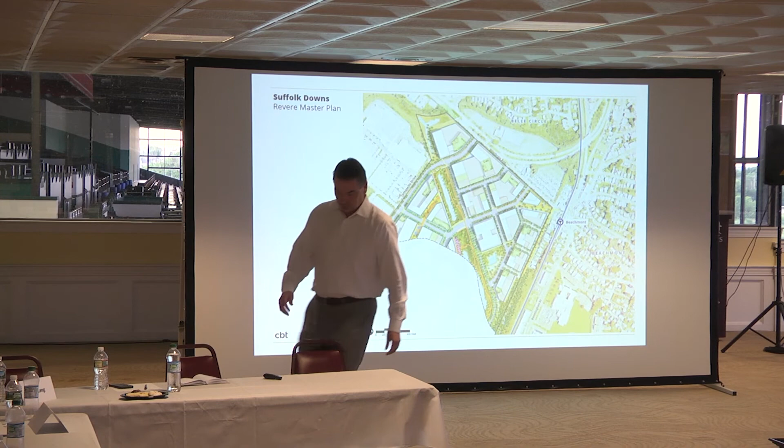Thanks. Going back to the infrastructure piece, we saw the charts that showed the streets within the project and so forth. I guess the one area that we didn't see and wasn't discussed much was Washburn Ave. What's taking place along Washburn Ave? Because you've got a hotel, you've got apartment units there. Obviously, there's going to be more traffic and activity on that street. So what's being done there?

It's a great question. So first, just to be clear, there is no vehicular connection to Washburn Avenue from our perspective. It's a side residential street today, and it should be tomorrow. And then working with the councilors, McKenna as well as Novoselsky, we also have a setback. So we have a 30-foot buffer off of Washburn Avenue. And then there's building height setbacks as well. So the buildings are not only pushed back, they're tiered. And we really see that as a landscape strip, buffer strip first.

And we haven't even proposed any pedestrian connections or bicycle connections either. I mean, that's clearly something we're not opposed to per se, but the idea is that our site really goes to Beechmont Square and then goes down. And then we purposely also made this building so that it really links up with the Beechmont roast beef parcel, so that it really directs the flow of people and activity to that area, so that Washburn can be what it is, which is a residential street.

And you have no designs on the east side of Washburn Avenue? No, because there's way too many homes and it'd be complicated. We got 161 acres. We don't need any more land. Yeah. So anyways, that's the proposal there.

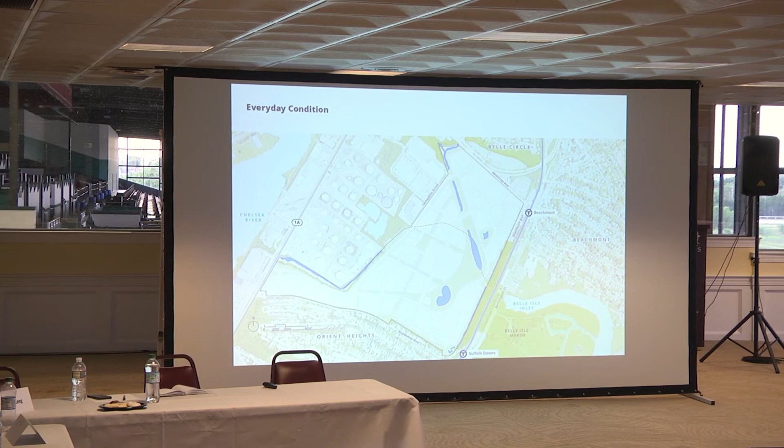And just one quick one that was the follow-up. Going back to the communications that Bob raised, the whole area comes up with cell, and I'm assuming it follows along with everything else you were saying, because in Beechmont, we've got a terrific issue with cell capacity now, and I know they're trying to get some concentrators and things, and now this is only going to add to the problem. Yeah. So the question really asks about cell coverage and everything.

Clearly, the good news, again, similar, AT&T, Verizon, T-Mobile, as soon as we start to build, they're going to be calling us, because again, we're going to be adding a lot of cell phone users, and they're going to want to make sure the coverage continues to be really good, if not improved. So in some ways, we've already seen this. I mean, the amount of state attention now to this area, which wasn't here before, I think is really good. So I think we're going to see some positive effects.

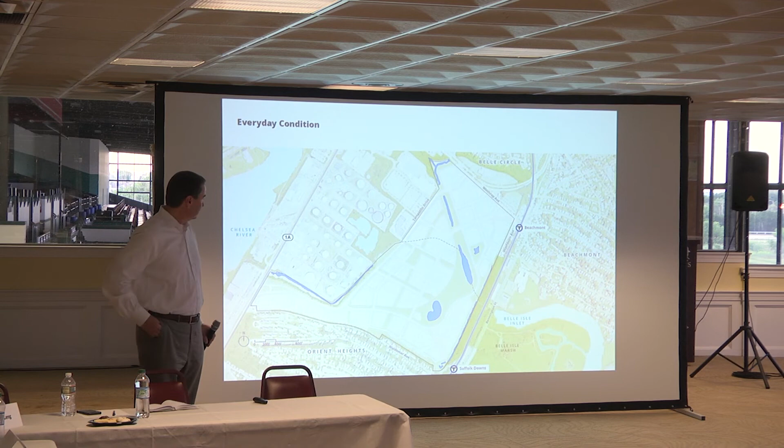I was wondering if you can speak to the timing of the buildings that are being put in for Phase 1 and the open space, both within that footprint of Phase 1 and the rest of the site. Like, when does the open space for active and passive use become available versus when the buildings go in place? So we're just showing you Phase 1. I think at our next meeting, we do mix of uses. We will show the phasing for the whole Revere side, but also the Boston side as well, so you guys can actually see Phase 1s on both sides and how it comes together.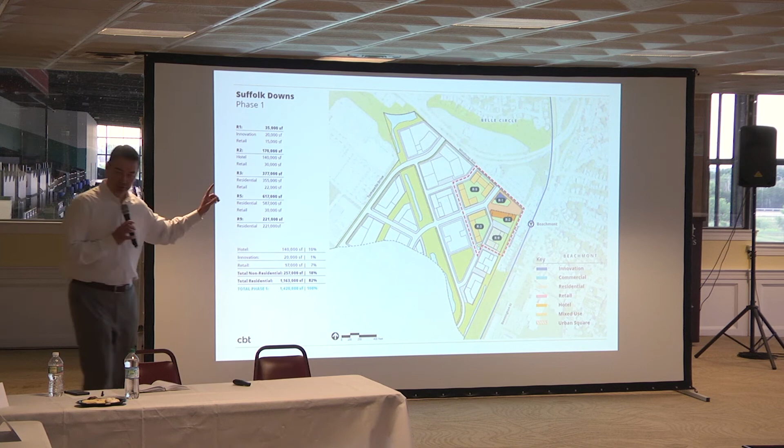We will also have, sorry, I keep getting in the way over here. We will also have more detailed phasing as to the open space, because again, our goal is that as we build out, we're having 25% open space for each of the phases. What I can talk about at a high level, the initial open space for this phase is partly the plaza area. There's also, it doesn't show well, a green spine here, but the main piece of open space is really that plaza, which honestly is a very expensive piece for us to build in the earlier phase. As we get to the subsequent phases, we would pretty quickly open that outdoor theater as well.

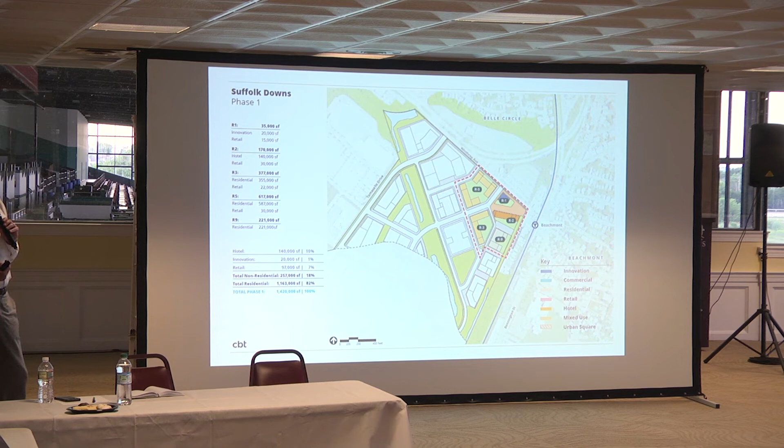And then it starts to build into the site as well. We're still working on what the open space phasing will be more specifically, but again, that gives you a high level, and we'll have more detail at the next meeting. The largest existing area, as you already pointed out, is the infield for the racing oval. Does that become accessible early on? So the good news is that the racetrack doesn't go anywhere. So I think it's a really important point.

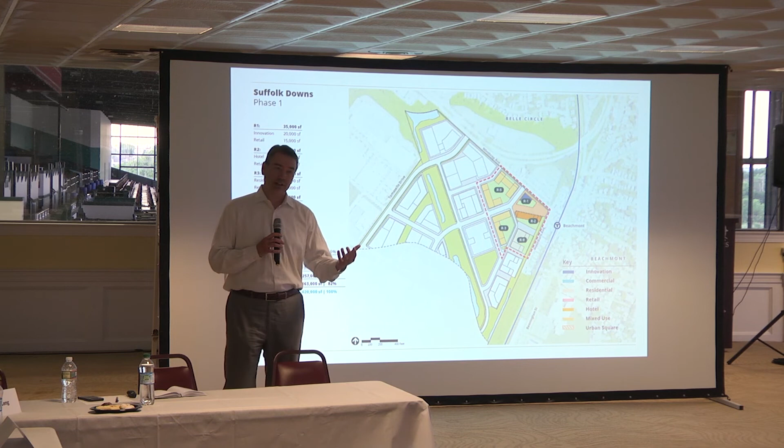We do have a minor issue, which is that this site was filled with urban fill. So maybe take a step back, and I'm sure we talked about the history. This site was originally filled for speculative residential land development back in the 1900s. And it never happened. So then in the 1930s, it got picked up by the racetrack owners. And the good news is it's only been a racetrack. The only minor issue is that urban fill was brought in, right?

So we do have low-level environmental conditions, which best practices are that we're supposed to cover all future open space with a foot of clean fill, which is just best practice, right? It just limits any kind of issues or liability. Again, this is not a lead works factory or a PCB. I mean, it's just urban fill type thing.

So we're still trying to work on a plan where we can open up maybe portions of that track to active or recreational use. We also have talked about, and this is probably more down the road, if we do a phase 1 at Beachmont and a phase 1 at Suffolk Downs, how do you connect between the two, right? Without just walking through the wasteland of parking lots that exist today. So I think we're going to be thinking about that as we go forward.

And so, I mean, we would love to open it up today, but that has implications, and we don't want to overpromise something, because for us to actually go put a foot of clean fill across the whole infield today, which is 15 acres, that's a very expensive proposition in the earlier phases, right? So one of the things that works for us is that we can phase the open space and the infrastructure throughout the site, which makes it a more successful development. But it is a good question.

And again, I think it's something that we need more time to think of, but we will be coming back next time and specifically show you when the portions of open space go with which phase. And the goal is that we do want to get to the full Central Park as soon as we can. It's probably more related to the second phase or parts of the third phase, because again, the site's so big, it's hard for us to redo that whole park right up front.

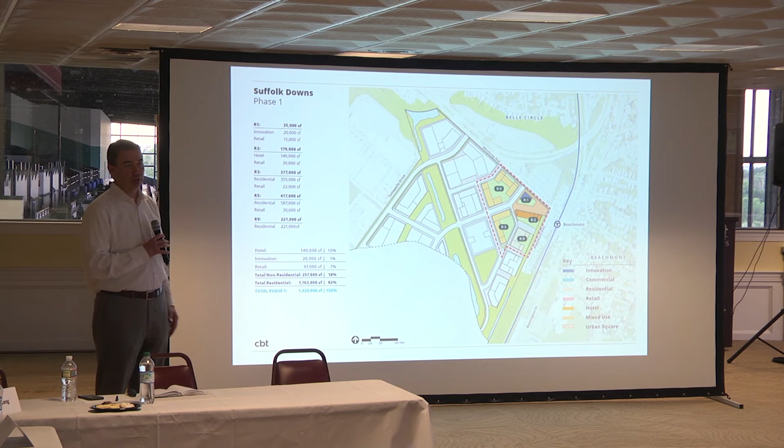Two other quick observations that may anticipate the discussion next time, but from the larger perspective, how do you see in the open space in particular a role for public art, number one, which can make some of these spaces very distinctive and iconic and interesting and attractive, but also has some issues associated with it.

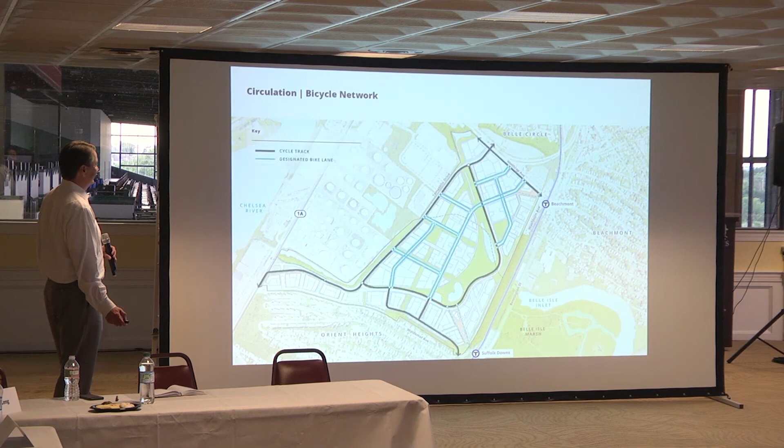And the second thing is Revere and Boston have been working on the idea of an ADA accessible playground for children who are challenged physically and otherwise. And this seems like it might be a possible home for that. And I would give some thought to that opportunity, because it would be unique in the area, and I think particularly appropriate for a forward-thinking development like this.

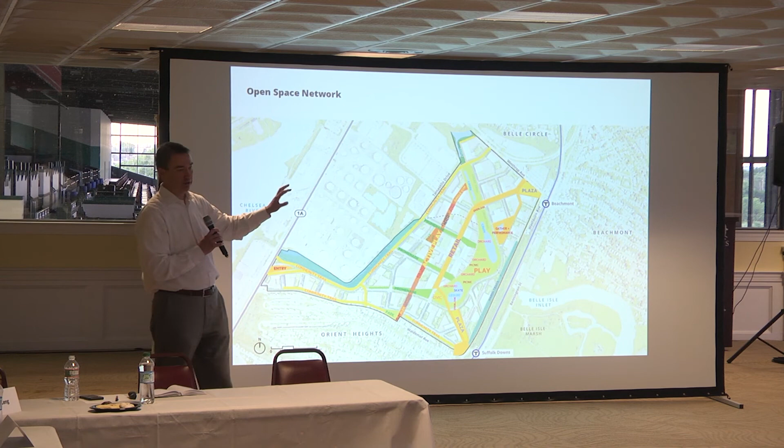So Bob, we definitely agree. And well, two things. Any park space that we build, first of all, has to be ADA accessible, right? Yeah, first. But we definitely agree that we could do something really special here that is an ADA playground or an interactive space. And I think you may have also seen some of the precedent images.

Our goal is, look, we may have some more standard type playgrounds, especially because kids love the playground structures. But we're also starting to look at a lot of precedent images for other types of play space that are much more innovative, that are fully ADA accessible, which I think is a really important point.

I think the other thing, too, is that someone talked about dogs. We will have at least 2 dog parks on this site, right? And I think it's really important because that's become a really important amenity for our residents, which will hopefully relieve some of the pressure on Belle Isle Marsh. We have an opportunity to do a lot of different types of active spaces, and it's meant to serve a very broad demographic, from those that are 2 years old to those that are 75 years old, right? So it's really meant to be broad, because this is a community from our perspective.

I'm missing something, but can you go back through some of your public, oh, thank you, yes. So I guess there are 3 themes that we want to put out there regarding the open space. First is, there are some really cool historical elements that exist today on the site. You'll see them. There's the finish pole lines. There's the starting gates. I don't know if you guys noticed, you walk in, there's horse head statues, which are really cool, flagpoles.

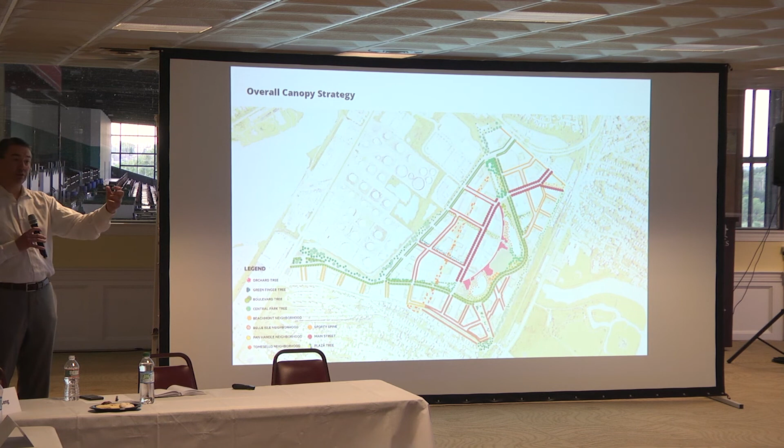The idea is that we're doing an inventory this summer to try to find all these unique elements, preserve some of them, and then actually put them into the open space system. And there might also be one very important interpretive place as well. But the idea is that people get a sense of history throughout the site. That's kind of one. Two, public art. Definitely love public art.

I mean, I think the idea is that, especially in the central space as well, we have a real opportunity for public art. How you do that, how you manage it, Bob, I think that's something we're going to have to work through as we go through it, but I think it's really important to us.

The other thing, which goes back to this overall canopy strategy, is that going to different neighborhoods, there's a native species approach to the trees, to the landscape, and to the environments that will actually shift from neighborhood to neighborhood as well. I don't want to go as far as calling it an arboretum type of thing, but the idea is that this Central Park actually becomes fairly heavily landscaped, and our goal is to make it very interesting. So it's not to be a monoculture type thing. We really want a variety of trees and everything.

Some things may actually cross through, like the Main Street may have a certain feel that crosses through all the neighborhoods because it has this connecting element. But as you can see, the reason why there are different colors on the trees is the open space strategy, and we'll have a more detailed presentation as we go forward. The idea is that this neighborhood will have a certain character of trees and distinctiveness, which is different maybe from the central neighborhood versus Belle Isle Square

versus the Central Park. And these are actually groves of trees. So these little dense pink areas are groves of flowering trees, again with a real strong look at native species. Let me say one more thing on that too. Going back to wetlands, we have a lot of invasive species today in Sales Creek and elsewhere. We'll be looking to heavily manage those to get rid of them and have more wetland-based native species that go through this system.

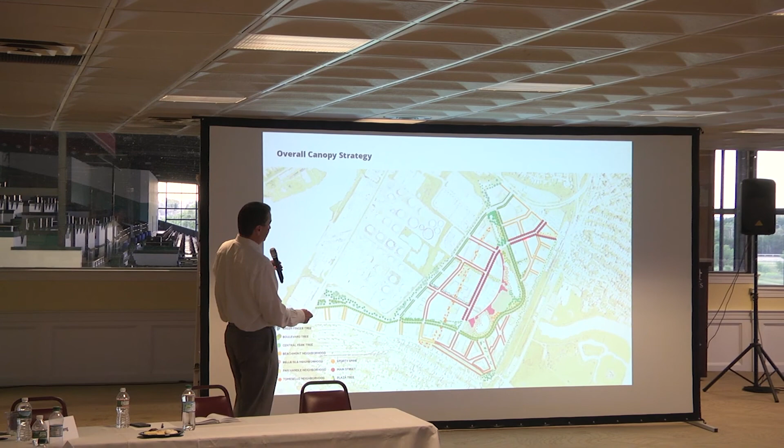It's going to be a short and sweet question, and I don't know if the answer is short and sweet, but talking about the trees, I look at that area in Phase 1 and I don't see a lot of trees, unless I'm looking at it wrong. So I'll go back this way. I killed my pointer now. All right, a couple of things. All of these are trees here. These are trees here. There's another tree line here, a tree line here. This is the plaza space, so there are trees in it, but it's also meant to be open. Looking at all those other areas around there.

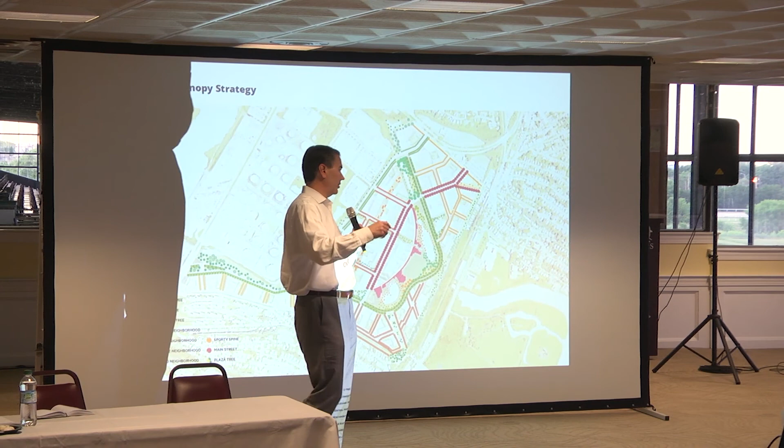Well, these are buildings. The one thing not showing here is that on the buildings we have what we call roof decks. We have enclosed parking that goes up a couple stories, and there's a roof deck over it. There likely will end up being trees and other things in these courtyards for those buildings. We haven't designed it yet, though. So this was just meant to show the streetscape and how important it is to have continuous trees.

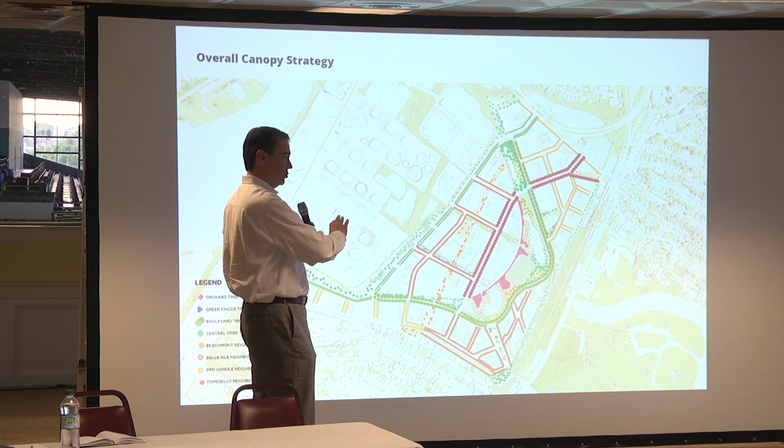The other thing, this is an earlier plan. There would actually be 2 rows on Winthrop Avenue, because we have the planting strip next to the curb, cycle track, and another planting strip. So this is more diagrammatic, yeah, the buffer as well. Yeah, this is going to be a heavily landscaped planted buffer. Yeah, so maybe the chart's not doing it justice. Yep.

Yeah, and again, the scale of this plan, I mean, it's representational of the concept. The scale of this plan is probably off because, you know, there's a lot more landscape that's going to show up there. And so as we come back with detailed plans, you guys will see that.

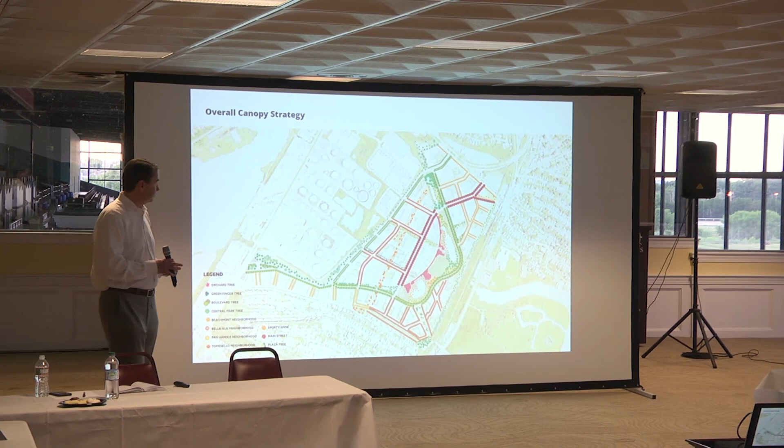Just so Ira doesn't have to ask the question, how much of the Winthrop Avenue buffer will be done in phase one? Will it stop at the end of phase one or continue up Winthrop Avenue and the boulevard?

Bob, you told me no hard questions today. Oh, the cameras are rolling too, Bob. That's, you know. All right, a couple of things.

So it actually goes back to something, Counselor, you talked about earlier too. So today you guys may remember that Tomasello comes straight out and ends here. It's actually very close to North Shore Road today, the existing Tomasello Road exit. One of the things that we're looking at doing, which will likely happen with phase one, is that we're actually realigning Tomasello to come out mid-block between North Shore Road and the Winthrop Avenue Revere Beach Boulevard intersection, purposely to get better queuing storage between both of those so the whole corridor works more efficiently. And we'll talk more about that when we come back with a traffic study.

Bob and his team and Frank have been really helpful. They have given us the plans to 205 Revere Beach Parkway, so we have seen those plans. We've actually met both with Bob, but also met with DCR, just reviewing what 205 Revere Beach Parkway is doing. Because obviously we weren't here when they started that project, so we're making sure that what their improvements are, we may make further improvements to what they're doing, but we obviously need to continue to go through that.

Our sense is there's no question that Winthrop Avenue will be completely reconstructed along phase one of our project. If we do this as part of the first phase, which we have to do, we think we'll end up reconstructing it all the way up on that side. Now, it'll be the cycle track and the sidewalk, because again, we have building pads beyond that, so we're not starting those buildings.

But I think the goal would be, it's at least this, and it very likely could be the whole thing, especially if we move the street, because once we move the street, then we should just do the whole edge of the road. So, and again, we're trying to be careful because this is a very expensive project and we're building a lot of infrastructure, so we're just trying to control. We'd love to do the whole thing. I don't want to overpromise until we know what the road is going on with Tomasello. You're thinking properly, though.

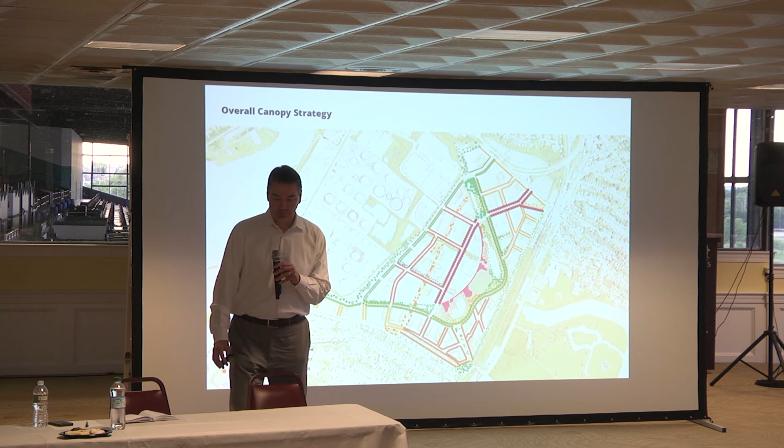Okay. First of all, thank you very much, Doug and Tom, for that very informative presentation. I also want to just alert people that we will not be meeting in 2 weeks' time because of the 4th of July week. We will be meeting on July 11th, and when we do meet, we will be discussing the very critical issues of use: residential, commercial, institutional, retail, parking, other uses, community uses, open space, etc. A very, very, very critical discussion that will happen on July 11th, and we will also get into the issues of the implication of those uses for municipal services and infrastructure elsewhere in the city. So it's a very important one. We hope that you can all make that.

And I will just ask the mayor to close, given the fact that he came all the way here from Worcester to be here. And Mr. Mayor, I'll leave it to you.

Thank you, Bob. Thank you, Doug, and thank you, Tom, for the presentation. Fantastic, as always. And I want to thank everyone who took time out of their busy schedules to be here this evening. I really appreciate the fact that you've been willing to participate and be part of this process, and look forward to all the great feedback that you have, and especially our ward councilors who are very helpful and have a great sense of what's going on in their neighborhoods and what the concerns are. So thank you guys, and just look forward to our next meeting on the 11th, and I hope everyone comes prepared with lots of good questions and good input. So thank you.